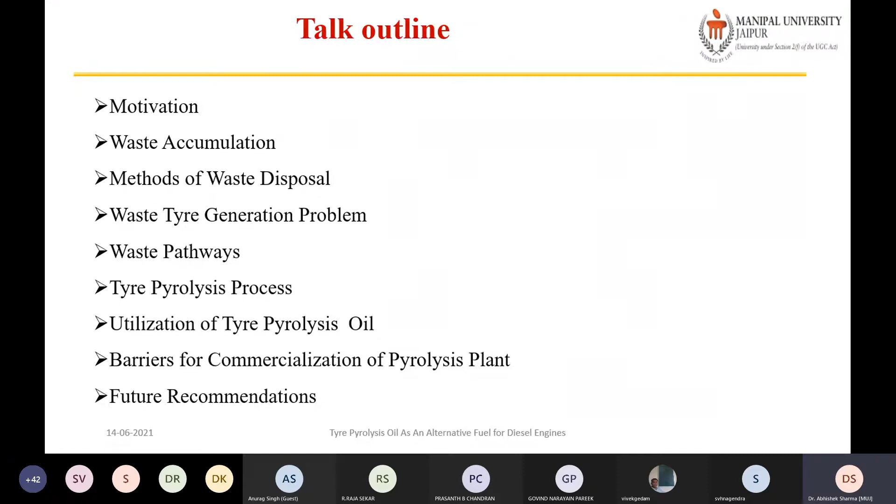So first of all, motivation—why we are discussing waste tire or alternative fuel. We all know in day-to-day life the common problem is global warming, because combustion of fossil fuel produces CO2, carbon dioxide, which is one of the GHG gases, greenhouse gas emissions, and that affects our environment. Second is sustainable development.

Integration of energy, water and environment systems with special emphasis on the principle of circular economy—meaning how the waste of one system can be used as a resource for another system, thereby increasing resource efficiency and minimizing environmental burden. If I talk especially about IC engines, we have tried to use EGR, exhaust gas recirculation, because simply leaving that gas into the environment contributes towards global warming.

Simply, waste heat recovery from power plants—that heat can be used to reheat the water supplied to the boiler. So many wastes are there, we can use that waste and enhance the overall system. Other is waste to energy or waste to wealth.

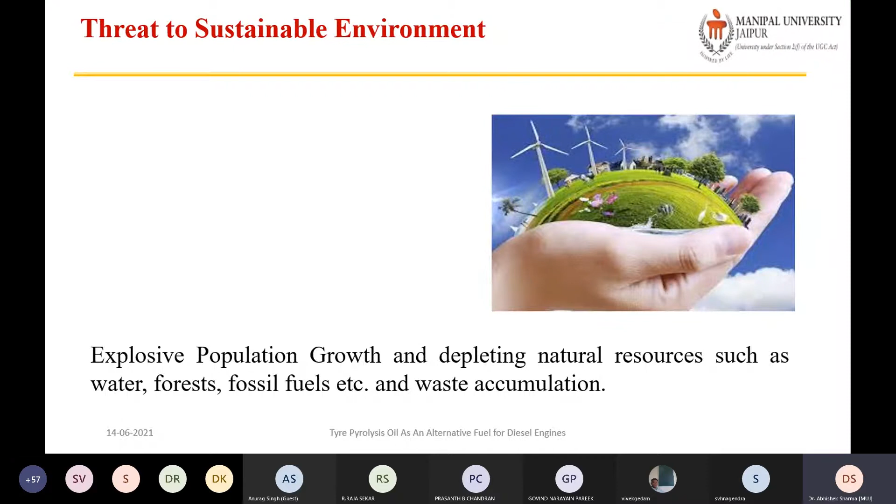To create awareness, I would like to start with this news: the waste generation problem in India. More than 1.3 billion people in India generate the highest amount of waste in the world, and that is expected to increase substantially by 2050 unless urgent measures are taken. This news came in the Times of India, and we can see how much waste is generated.

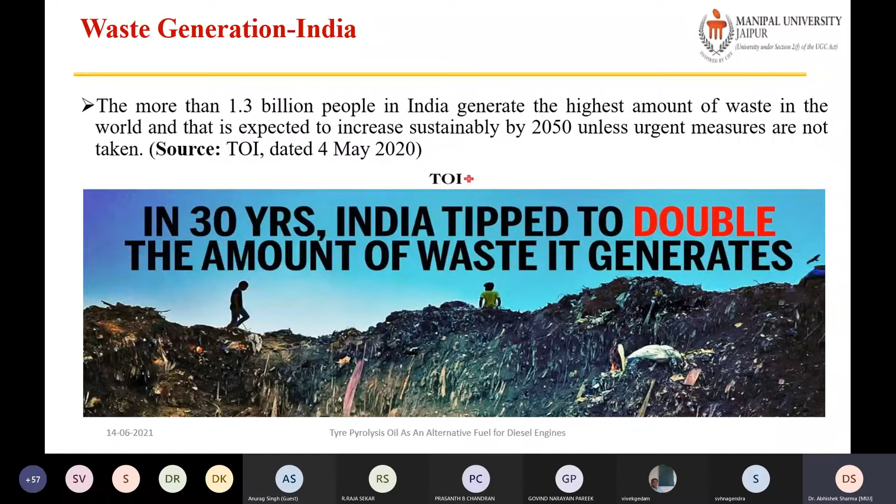We must be careful whenever we go to market, asking for polythene. As educated persons, first of all we must try to minimize the use of such things. So many wastes are there that we cannot avoid, that will come definitely, but from our side, if we can minimize non-biodegradable waste, that will be a big contribution towards the environment.

So first of all, what is the meaning of waste? In simple terms, waste is defined as a discarded material which has no value in normal or ordinary use. What we say is not useful, we simply throw it away - that's waste in common language. But as per EPA, the US Environmental Protection Agency defines waste as any garbage or refuse, sludge from a wastewater treatment plant, water supply treatment plant, or air pollution control facility, and other discarded materials, including solid, liquid, semi-solid, or contained gaseous materials resulting from industrial, commercial, mining, and agricultural operations, and from community activities. So this is the definition of waste.

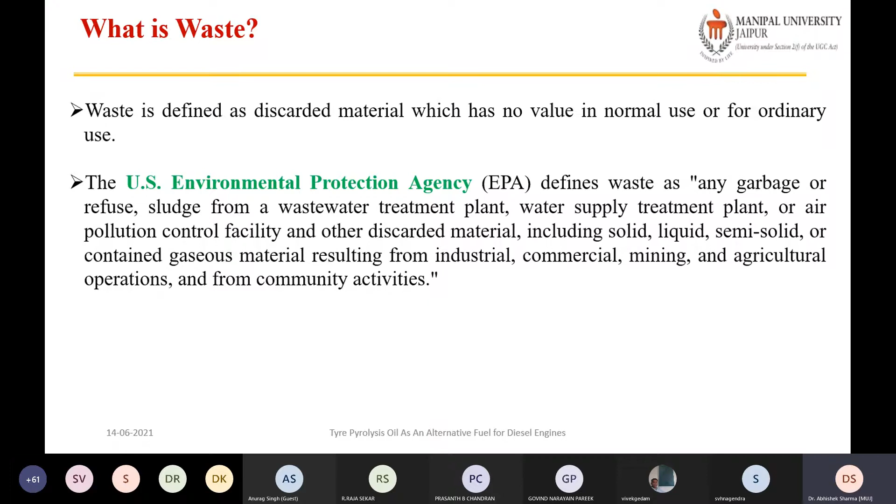So the origin of waste - a broad classification of sources, we can say the different origins of waste. Mining waste, where waste rocks, tailings, mine water, chemicals, and others are there. To minimize this waste and to utilize it, many people are using mining waste to make composites.

Then agricultural waste - some techniques and methods have already been used for a long time using agricultural waste. Especially, some agricultural waste is used to produce ethanol, and other waste is mixed with cow dung and used to produce biogas. These are common methods that have been used since earlier times.

Then industry waste - textile, plastics, chemicals, ash, nuclear waste, and other waste. Here also, if we particularly talk about IC engines, waste generated from sugar industries is also used to generate biogas.

And household, commercial and government bodies produce waste like municipal solid waste, electronics, medical waste, tires and others - these are all non-biodegradable waste. Then construction and demolition waste - concrete, plastic, wood, metal, wastewater treatment. Even sewage sludge - biodiesel can be derived from sewage sludge. So many wastes are there, and there are different options available to convert those wastes into some useful form of energy. These are the broad origins of waste.

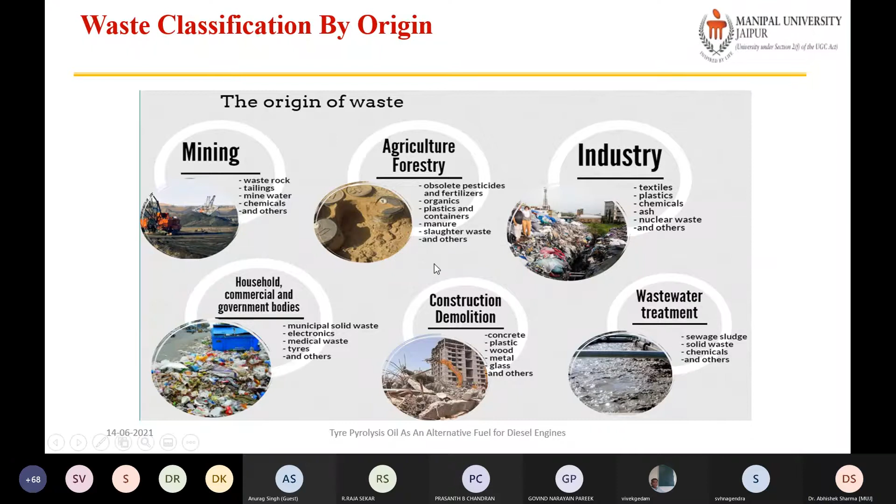This is a fact: there are few things certain in life. One is death, second is change, and the other is waste. Going through all these problems, we cannot say waste can be completely banned or stopped. Definitely there will be some kind of waste, but our responsibility is to use reusable things, so that the waste accumulation problem is minimized. And after that, if waste is coming, we must find a solution so that waste can be used in some useful form.

So why is this waste accumulating, or why are more wastes coming? Rapid industrialization and population explosion result in a lot of waste disposal problems, which will be a great challenge to many countries in the near future. Increase in population is affecting every country. There are different types of waste, like factory waste, domestic waste, e-waste, construction waste, food processing waste, biomedical waste, agricultural waste, nuclear waste, and slaughterhouse waste.

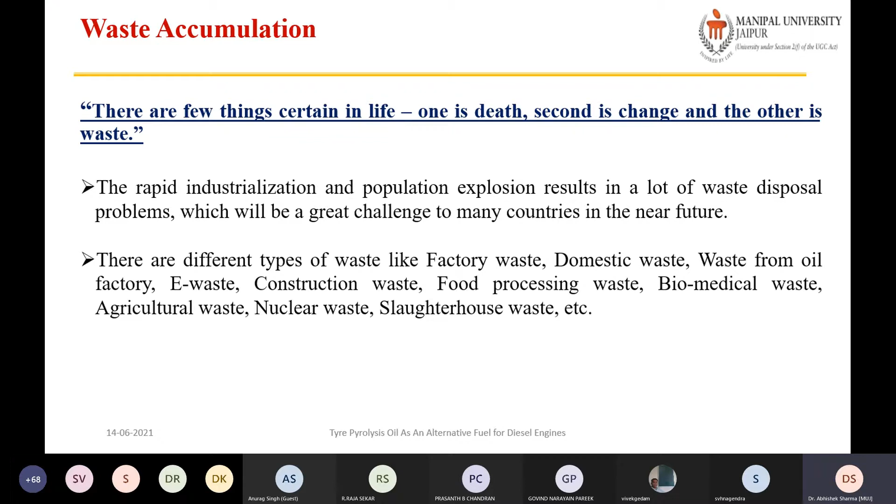So these are the different sources of waste. Waste is broadly categorized in two types. The first one is biodegradable waste, which consists of organics that can be utilized for food by naturally occurring microorganisms within a reasonable length of time.

The biodegradable organics comprise agro residue, food waste, leaves from garden waste, from poultry farms, etc. We need not worry much about biodegradable waste, because after some time it will automatically degrade. But we must think seriously about non-biodegradable waste.

These are waste which does not decompose in the environment and pollutes it to a great extent. Such waste generally composed of plastics, rubbers, nuclear waste and their likes. These waste take millions of years to decompose, and they are the ones which are mostly filling the landfills.

For example, we go for servicing. We do not bother about whatever used lubricating oils are coming. What these service center people are doing, simply they throw it somewhere. They will not bother about how much impurity is there, where they are throwing it, how badly that will affect the land and the environment.

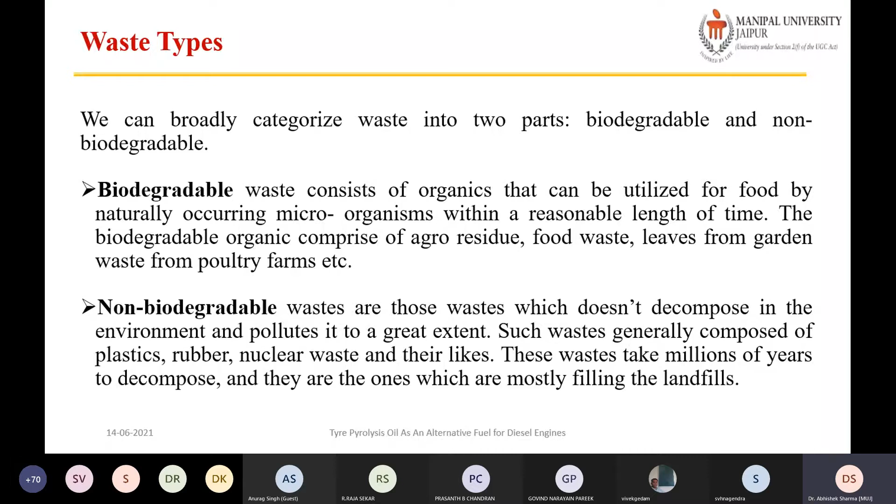So these are the common harmful effects of waste accumulation. What we do, we simply dump somewhere. We do not think where we are throwing it. But when rainy season comes, this waste comes to our door. The same thing happens in Kerala also.

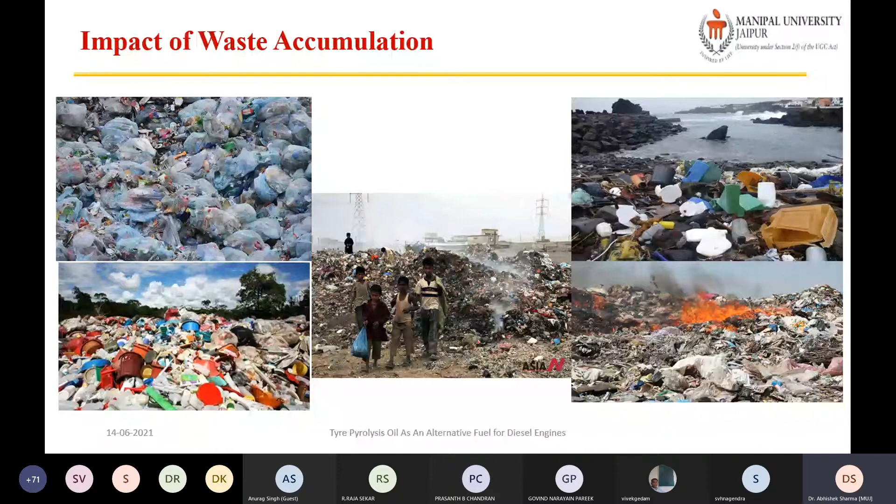So we must think seriously in this direction, how we can minimize the waste, or how we can convert this waste into some useful form of energy, or how we can recycle this waste. So these are the common methods: landfill, where we simply dump all this waste in a yard.

In the morning, waste is collected door to door and simply dumped somewhere. Other methods are there: incineration, where in industry some waste is sent to a furnace, burned, and the heat energy is used. Or waste compaction, or biogas generation.

If someone has a large amount of land and animals, he can use his agricultural waste and cow dung to generate biogas. In that manner, he is converting waste into a useful form of energy, and whatever byproduct comes, he can use as manure.

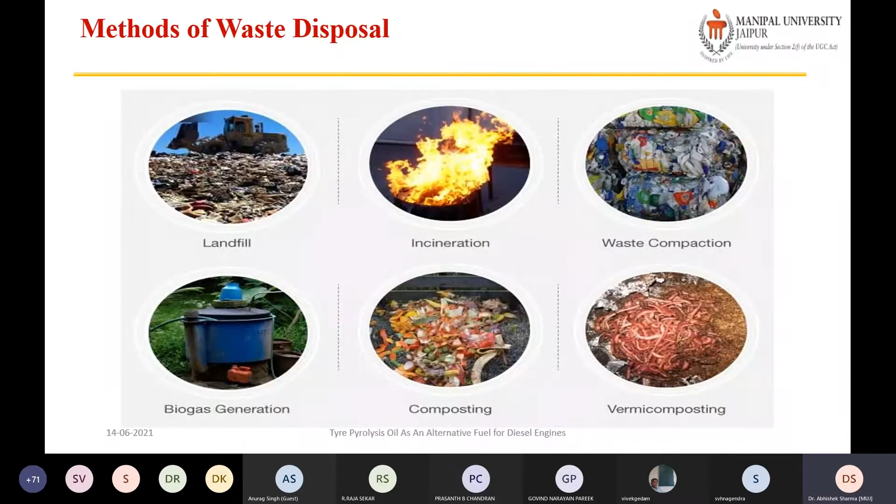Other methods are composting, so organic biodegradable materials, no issue, will compost, or vermicomposting. So these are the common ways of solving the waste accumulation problem.

If we compare old and recent techniques of waste management or waste treatment, in earlier days disposal and incineration were common, but disposal simply meant putting waste somewhere in dump yards. So that will be an environmental disaster.

Many times we have seen that automatic burning starts, or even if it doesn't, just by accumulation so many gases come, that is greenhouse gas emissions. Incineration also contributes towards greenhouse gas emissions.

The recent methods are biological treatments and thermal treatments. We have learned many thermoconversion methods. By biological treatment and thermal treatment, we can convert this waste into some useful form of energy. Which method we must select depends totally on the feedstock.

So these are the different methods. If we do broad classification, there's thermochemical process and biochemical process. In thermochemical process, there's incineration, direct burning in the furnace, and whatever energy is released we can use for many applications. Also gasification and pyrolysis.

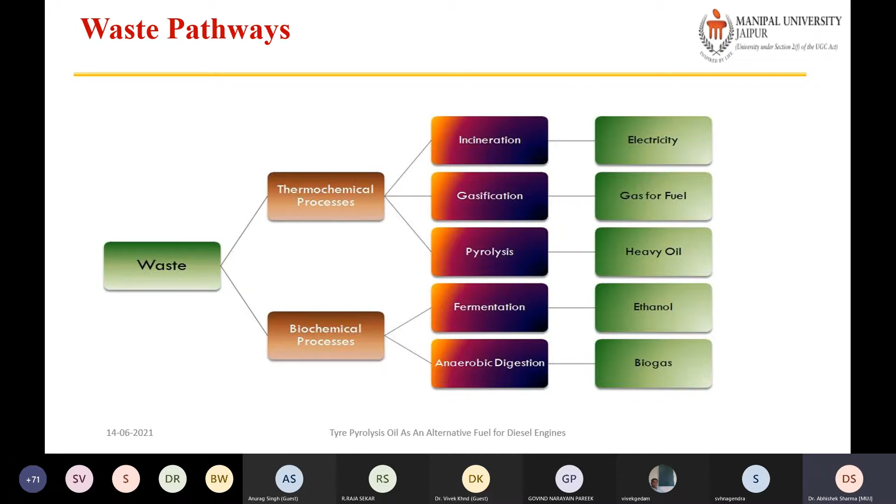So coming to the main point, the waste tire generation problem - what is the issue, how is this waste generated, what are the different possible wastes. The number of waste automobile tires in the world increases every year due to the increase in vehicle population. It is estimated that about 2 to 3 billion tons of waste automobile tires are disposed annually in the world.

Because of showcasing also, nowadays in every house - in earlier days we hardly had one two-wheeler or one four-wheeler, but nowadays if a family has 4 members, everyone has their separate vehicle. So population is increasing, and the priority of individuals having vehicles is also increasing, so the number of automotive vehicles is increasing. Because of this, we are not only contributing too much pollution to the environment, but also the waste generation of tires, because after some time tires reach end of life and become waste.

So the waste automobile tires are majorly disposed from the USA, European countries, Australia, Japan, China, and India. The waste tire is composed of rubbers, chemicals, steel wire, fabrics, and cotton.

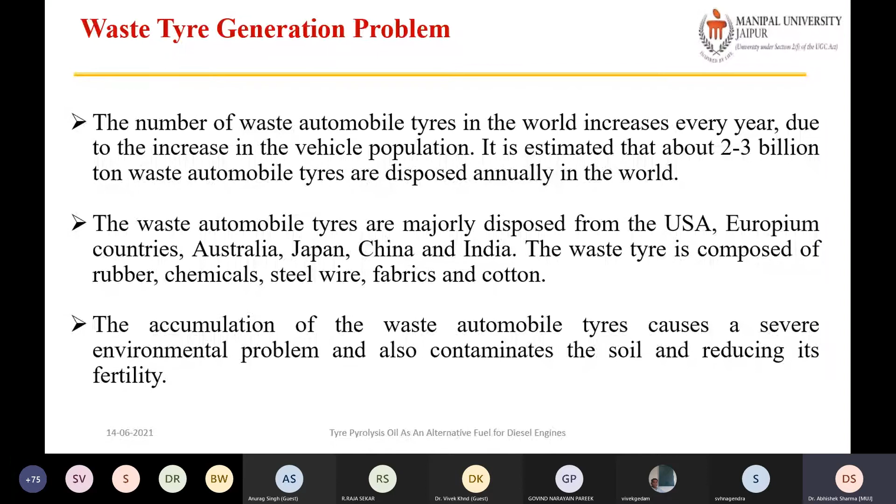The accumulation of waste automobile tires causes severe environmental problems and also contaminates the soil, reducing its fertility. These dumps are a serious threat to both the natural environment and human health because of the risk of fires, and they are used as suitable habitats by rodents, snakes, and mosquitoes.

Even sometimes, inhaling petrol or the burning of tires, some people feel very good, but you will be wondered to know that by inhaling this, tire pyrolysis oil absorbs hemoglobin from human beings. Also, because of continued inhaling, men can become impotent and women can become sterile. So these are various serious issues.

So we must never burn tires or plastic in the open atmosphere. The burning of automobile tires is toxic and harmful to human beings, and therefore it is banned in most countries in the world. The anthropogenic gases rising from the disposal area is one of the reasons for greenhouse gases.

So one simple way, even in our day-to-day life, we collect different types of waste and find the optimal solution is burning. But we don't know that by burning, we are contributing towards greenhouse gas emissions and global warming. So many kitchen wastes are there too - rather than simply disposing of that, we can convert it into manure by keeping it in small gamlas. These are very small and common things which we can do to reduce waste accumulation.

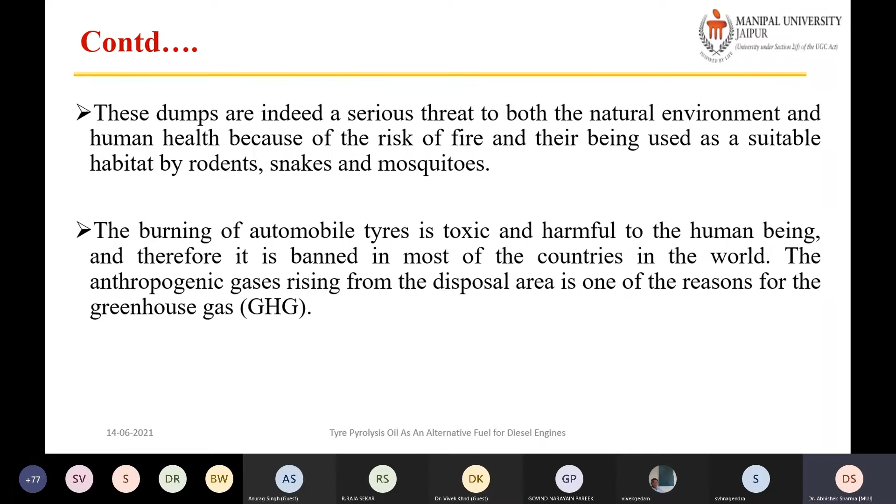So open tire emissions include criteria pollutants such as particulates, carbon monoxide, sulfur oxides, oxides of nitrogen, volatile organic compounds, and they also include non-criteria hazardous air pollutants such as polynuclear aromatic hydrocarbons, dioxins, furans, hydrogen chloride, and benzene. These are the different pollutants which we get by burning of tires.

So these are the primary pollutants, but we don't know that these primary pollutants, when they come in contact with air, with oxygen, in the presence of sunlight, convert into secondary pollutants - photochemical smog, ozone depletion, acid rain are the secondary pollutants. So not only greenhouse gas emissions and global warming, but also a threat to the environment is there when we burn tires in the open atmosphere.

One of the major fire hazards recorded in history was in 1999, when a tire dump in Westley, California burned for 36 days after being accidentally ignited by lightning, which caused pyrolytic oil to flow and contaminate nearby streams and water bodies. Many such incidents have already happened everywhere, so we must avoid accumulating and burning tires.

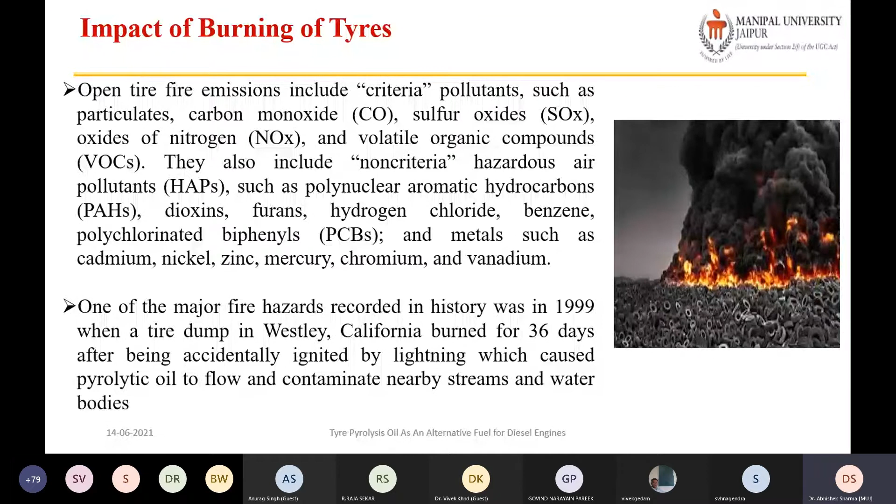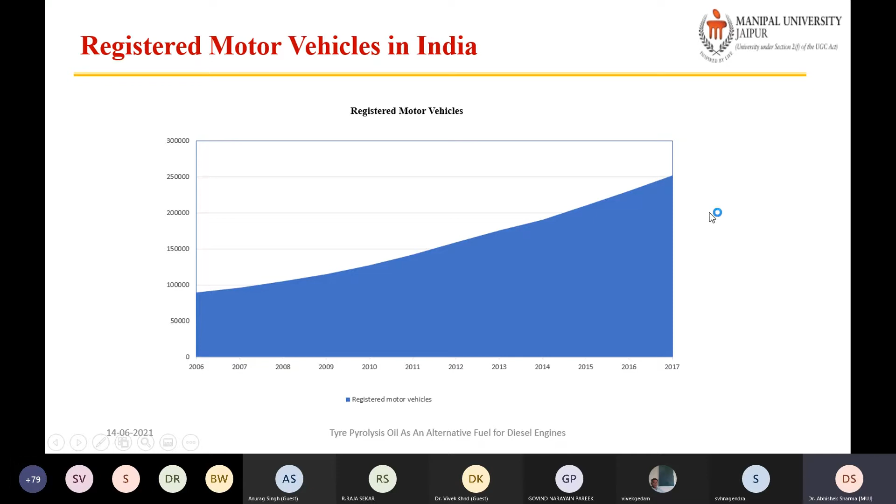This is the case - we can see that year to year the number of automotive vehicles is increasing, and in this manner, the accumulation of waste tires is also increasing.

So what are the common ways of tire recycling? First, some plastics are recyclable, so we can recycle those. Here also the most common way is retreading. The worn part is replaced by a new one, so a new tread is applied on the casing of the old tire to use it in its new form. The tread is a groove cut on the tire surface, used to provide friction between the road surface and tire.

Then there's the end of life tire, which we can recycle or use for energy recovery. How can we use it for energy recovery? Simply by co-combustion with coal to produce thermal energy, used in the boiler to produce electricity. From earlier times, waste tires have been used in cement furnaces to get heat energy. Then the promising way is pyrolysis.

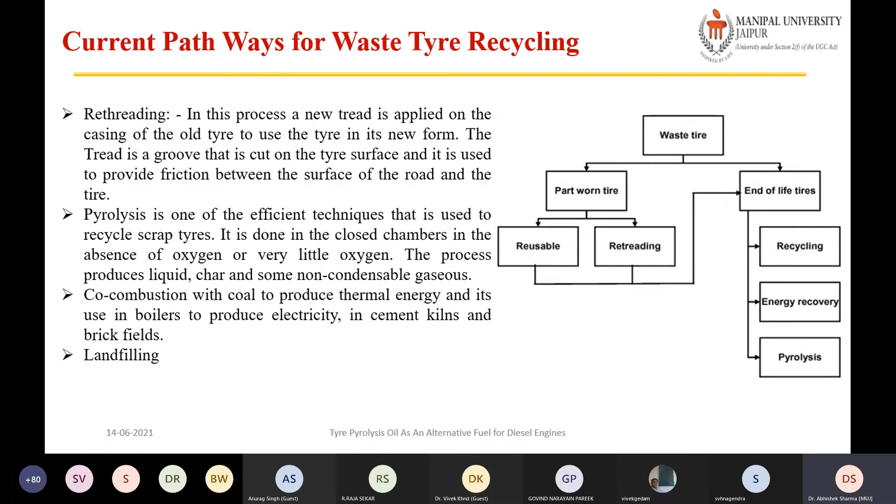Among all these, pyrolysis is one of the most efficient ways to convert this waste tire into a useful form of energy. Pyrolysis is one of the efficient techniques used to recycle scrap tires. It is done in a closed chamber in the absence of oxygen or with very little oxygen, and this process produces liquid, char, and some non-condensable gases.

So why are we thinking about waste to energy? Because global energy demand is increasing dramatically due to increased industrialization, the overwhelming rise in number of automotive vehicles, and growing population. So population is increasing, number of automotive vehicles are increasing, and at the same time fossil fuel is depleting. That's why we are thinking more about the use of renewable energy to convert waste into energy.

As per the reports of the International Energy Agency, global energy demand is expected to increase by about 53% by 2030. That's why a lot of research is going on in electric vehicles, biofuels, and solar energy. So we are moving towards non-conventional, renewable energy sources.

Currently approximately 86.3% of world energy demand is fulfilled by fossil fuel, in which crude oil contributes about 32.6%, whereas coal and natural gas contribute about 30% and 23.7% respectively. After all this, the contribution by non-conventional energy sources is only about 13 to 14%. This contribution needs to increase in terms of solar energy, wind energy, energy from biomass, and waste to energy.

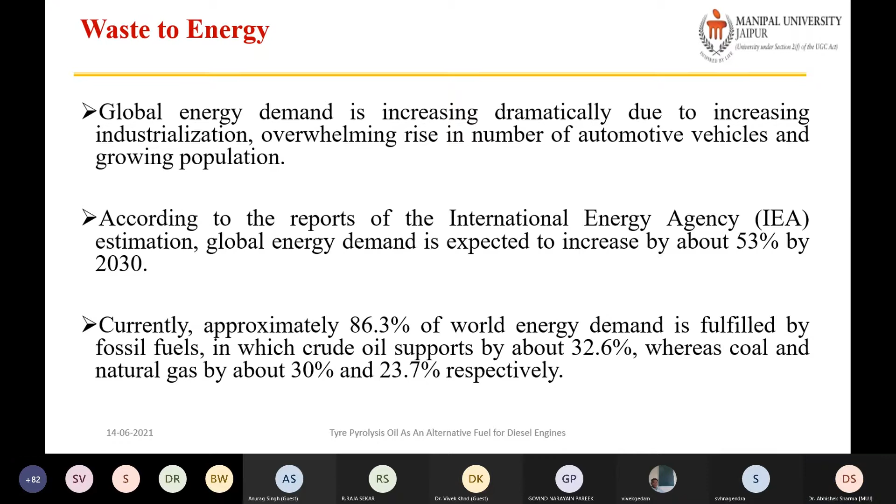So that is the reason we are thinking about how waste can be converted into a useful form of energy. On the contrary, nuclear energy and hydroelectric energy contribute only a small portion, about 4.4% and 6.8% respectively.

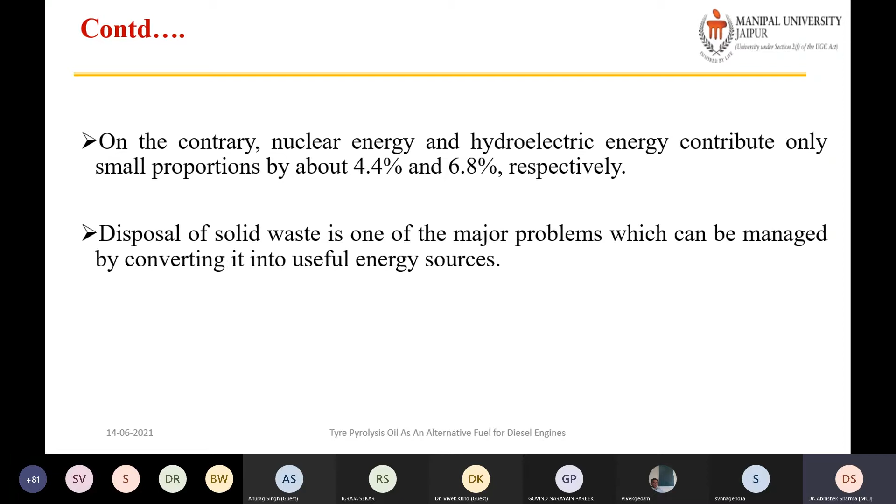Disposal of solid waste is one of the major problems, which can be managed by converting it into a useful form of energy. If we simply dump it somewhere, it will occupy land and also generate anthropogenic greenhouse gases. By converting this waste, we are not only solving the accumulation problem, but also generating energy and generating wealth from this waste.

So how can we do this? Pyrolysis is one of the thermochemical methods. This method can be used to convert waste tires, and even different types of waste, so we can select this process to convert them. But sometimes it depends on the particular feedstock, where we do not get that amount of yield.

Pyrolysis is one of the thermochemical methods to convert waste automobile tires into useful energy. The thermal decomposition of biomass in the absence of oxygen into carbon-rich solid and volatile matter is termed pyrolysis or thermolysis. It is derived from the Greek word pyro, meaning fire, and lysis, meaning breakdown or decomposition. In this process, heavier molecules are broken down into simpler molecules in the absence of oxygen by external heating.

Pyrolysis is a simple method to convert waste automobile tires into value-added products. In pyrolysis, long chain polymers are thermally broken down at high temperatures, 300 to 900 degrees. But based on previous research, we can conclude that the maximum amount of yield is obtained by pyrolysis at about 500 degrees centigrade, breaking the polymers into smaller molecules in the absence of oxygen.

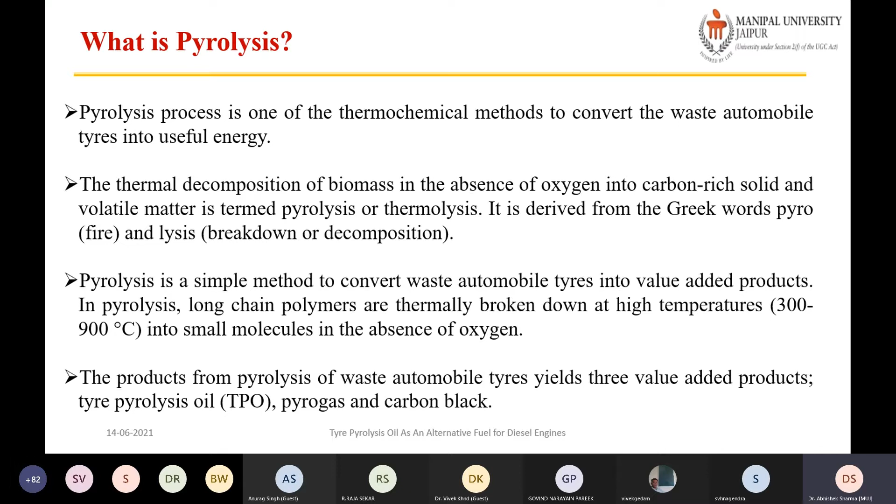So the first one is the liquid. When biomass is used, sometimes it is also known as bio oil or pyrolytic oil. Based upon the feedstock, the name is also given, like waste wood is used to convert into useful form, so that is known as wood pyrolysis oil. Some amount is pyrogas, which also has some energy and can be used as a fuel, and carbon black.

So this is the process of pyrolysis. First, in the reactor, tire is fed, and inert gas is flowed to create vacuum. Pyrolysis is done in the absence of oxygen, or in the presence of very little oxygen. Then external heating is done, so the waste tires are converted into vapor form, and those vapors are condensed, then we get the liquid product.

So suppose 1 kg of tire we are feeding, then about 50 to 55% yield is liquid. Then about 25 to 30% yield is solid carbon black, also known as char, and about 20% is pyrogas. All three yields can be used for different purposes. So by this process we can convert the waste tire into 100% usable form.

So these are the compositions of tires. From the pyrolysis process we get the products. Pyrogas is a combination of different gases: hydrogen, carbon dioxide, carbon monoxide, methane, ethane, propane, butane, and oils. When we condense oils at different vapors at different stages, the quality of oil varies. So if in a particular reactor we condense the oil in 3 different stages, we get 3 different qualities of oil. And char is also there.

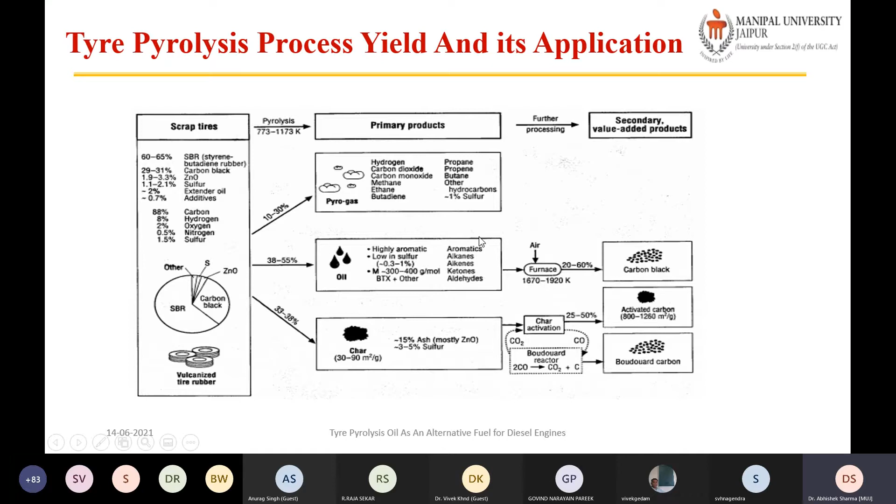So what are the different yields? As already discussed, there are basically three yields: solid, liquid and gas. Liquid from the pyrolysis is also known as tire pyrolysis oil. The amount of liquid produced from the pyrolysis process is the highest compared to solid or gas products.

The color of this liquid is dark brown and has resemblance to crude oil. The liquid at the end of pyrolysis consists of organic additives, processing liquids as part of the tire formulation, and tire formulation products. The TPO has energy content in the range of 39 to 44 megajoule per kg, depending on the feedstock used. So by this process, the maximum percentage, about 50 to 55%, of liquid product we get is known as tire pyrolysis oil.

So before using it as an IC engine fuel, we must check different properties. One of those is the calorific value, which is in a good range, about 39 to 44 megajoule per kg. This liquid is actually a mixture of different types of hydrocarbons, but its properties are closer to diesel fuel. That's why this tire pyrolysis oil is used especially in diesel engines.

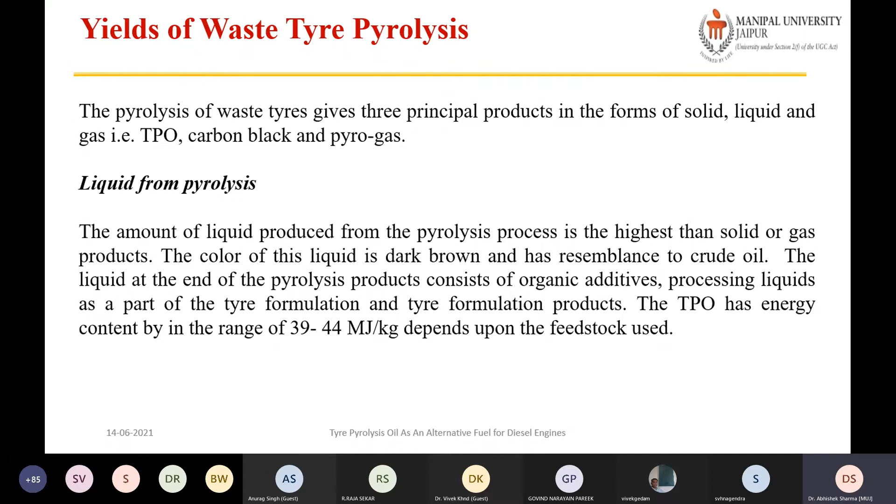Then gases from pyrolysis. After the recovery of liquids from the pyrolysis process, some gases formed during the process are left, which are non-condensable. These gases are called pyrolytic gas or pyrogas, mainly composed of hydrogen, carbon monoxide, carbon dioxide, methane, and ethane. These gases also have some calorific value and can be used as fuel.

So in European countries, what they are doing is initiating or starting the furnace by other means of heating, like wood or electric, and after that, when these gases are produced, they collect the gas in a gas bag, or simply use it in the furnace. So rather than simply sending it to the environment, we can use this gas as a source of energy.

Other is char from pyrolysis. This solid product is also known as char or carbon black. We get about 25 to 30% char. The pyrolysis process gives an opportunity to recover carbon rich solids from used organic matter. In the case of tires, the carbonaceous solid formed is partially carbon black and partly the inorganic material added to tires like Si, Zn, Ca. This also has calorific value, about 25 to 34 megajoule per kg, depending on the type of pyrolysis and feedstock used.

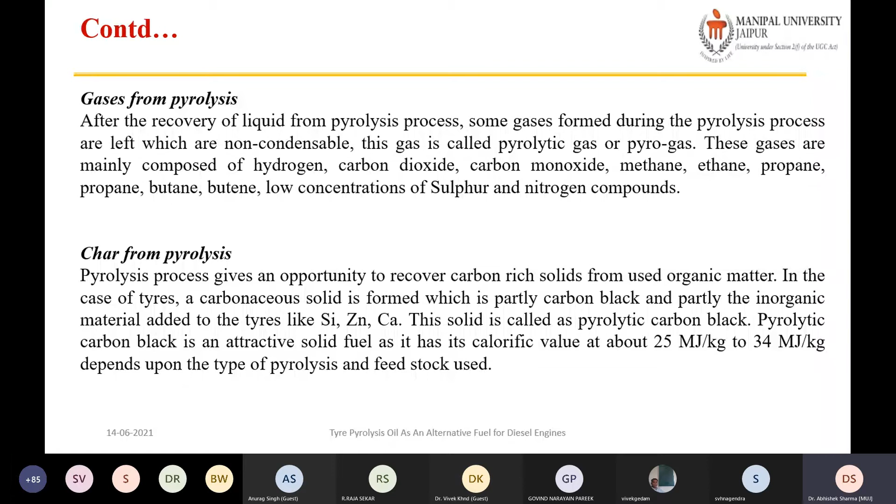So, types of tire pyrolysis process. There are different ways to classify pyrolysis based on operating conditions and environment, such as hydropyrolysis, vacuum pyrolysis, catalytic pyrolysis, oxidative pyrolysis, steam pyrolysis, slow and fast pyrolysis. Based on the environment and catalyst used, many types can be classified, but the broad classification is on the basis of temperature: low temperature, medium temperature, and high temperature pyrolysis, also known as slow, fast, and flash pyrolysis.

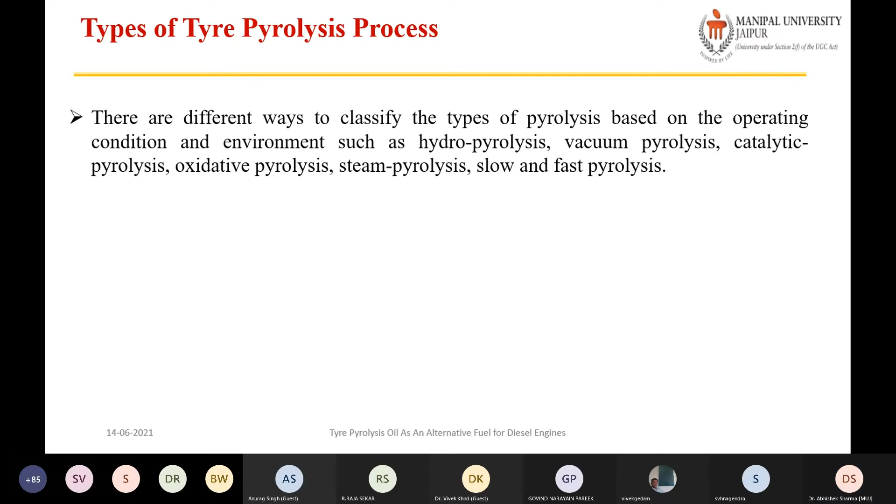What happens in low temperature pyrolysis? This is also known as slow pyrolysis or conventional pyrolysis. It completely depends on which kind of output we want - more liquid, or more gaseous by-product. Based on that, the pyrolysis process is also classified.

In low temperature pyrolysis, it is usually carried out in combination with slow pyrolysis. This is also known as conventional pyrolysis, which has higher residence time; higher amounts of solid and liquid products are formed, and lower amounts of gaseous products are formed. In case of waste tire, the maximum amount of liquid yield is obtained between 450 to about 550 degrees centigrade.

Then medium temperature pyrolysis is generally used for maximum conversion of carbon into biomass. There is a linear increase in temperature which simultaneously increases the conversion of carbon to higher yields. It can be used when there is more requirement of gaseous products and a small requirement of coke and tar.

Then the third one is known as high temperature pyrolysis, also known as flash pyrolysis. It comes with a high heating rate and small particle size. It helps in the rapid removal of volatile particles. It is the first step towards gasification of biomass. These conditions decrease the tar yield. The process is a combination of both slow and fast pyrolysis depending upon the product required.

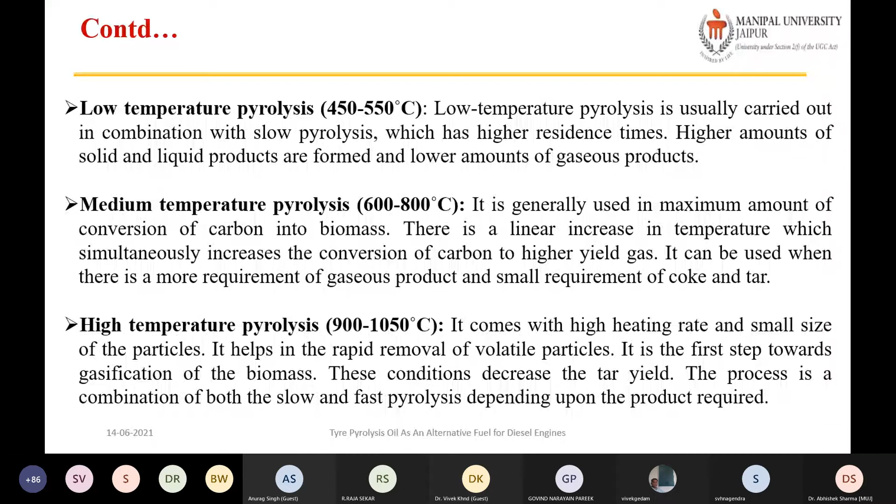Then the important factors which affect the output are temperature - pyrolysis liquid yield decreases on increasing the temperature above 500 degrees centigrade. Then heating rate, which is also one of the most important parameters affecting output - higher heating rates need more energy while pyrolysis time is decreased. Then particle size - if the particle size is finer, the liquid yield will increase.

Types of pyrolysis reactor - which kind of reactor we are using also affects the yield of the process. Carrier flow rate and type - which kind of inert gas we are using to create vacuum, and what is the flow rate. Residence time of the volatiles inside the reactor. These are some important factors which affect the output of the process.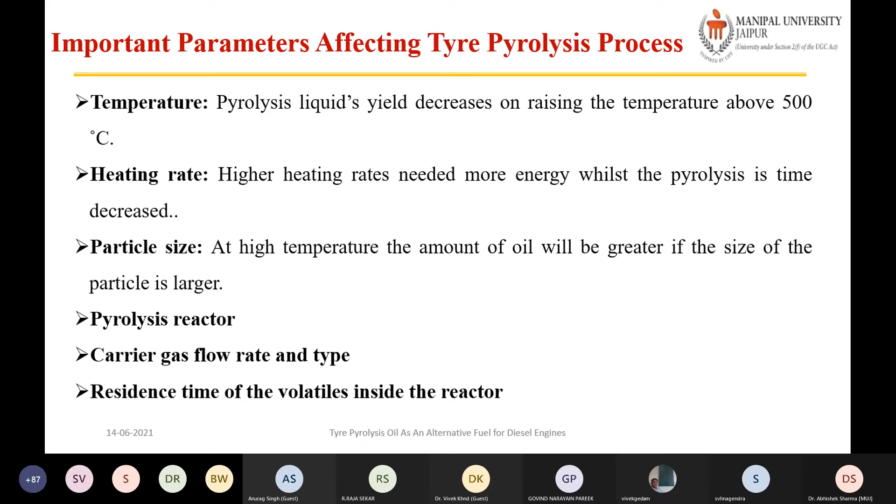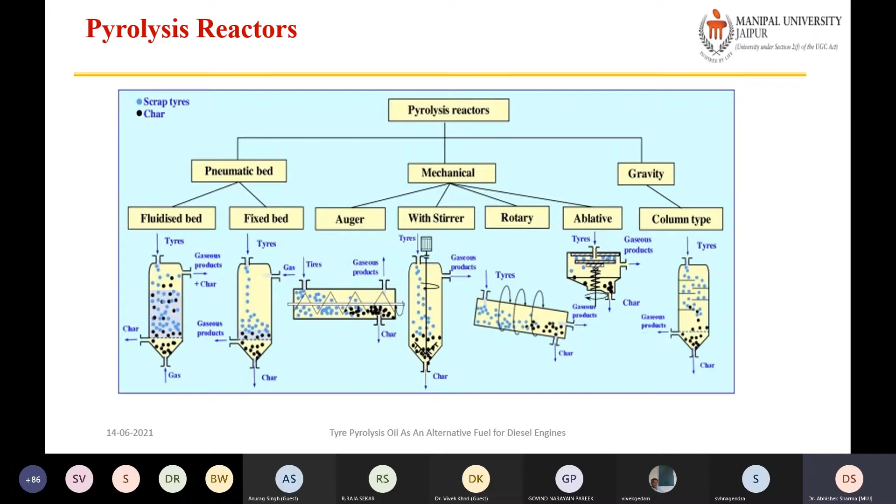These are some common types of reactors. The classification is pneumatic type and mechanical gravity. The most common types of reactors used are fixed bed and rotating ones. Even in our waste to energy laboratory, we have a fixed bed reactor and a rotary bed reactor, where we convert different types of waste into useful form.

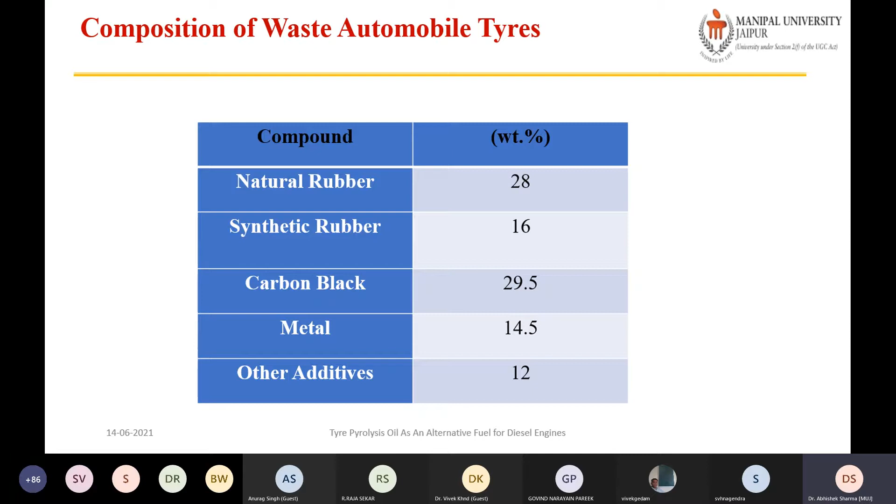Now I'm particularly going to discuss the pyrolysis of waste tires. This is the compounds available in a truck tire. Natural rubber is about 28%, synthetic rubber is about 16%, carbon black, metals, and some additives to enhance the properties of the tire make up about 12%.

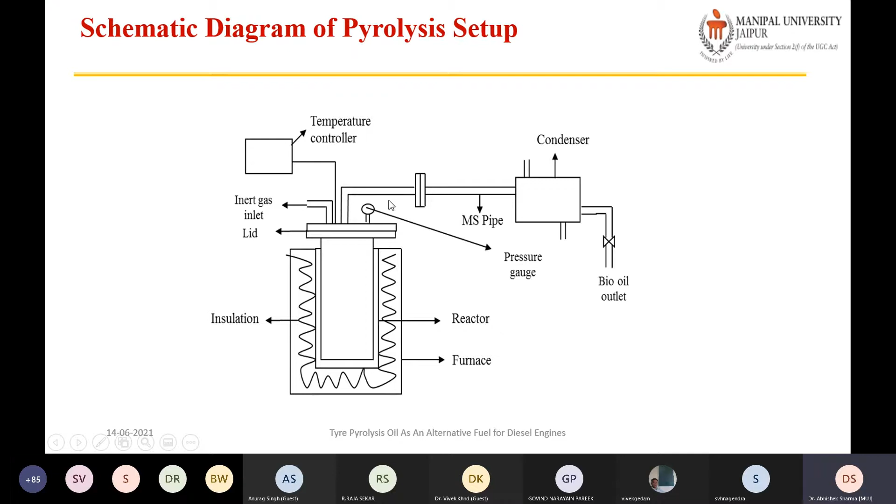This is the reactor. After heating, the vapor generated is collected here, when it cools down through the condenser. So this is the small scale laboratory type pyrolysis reactor.

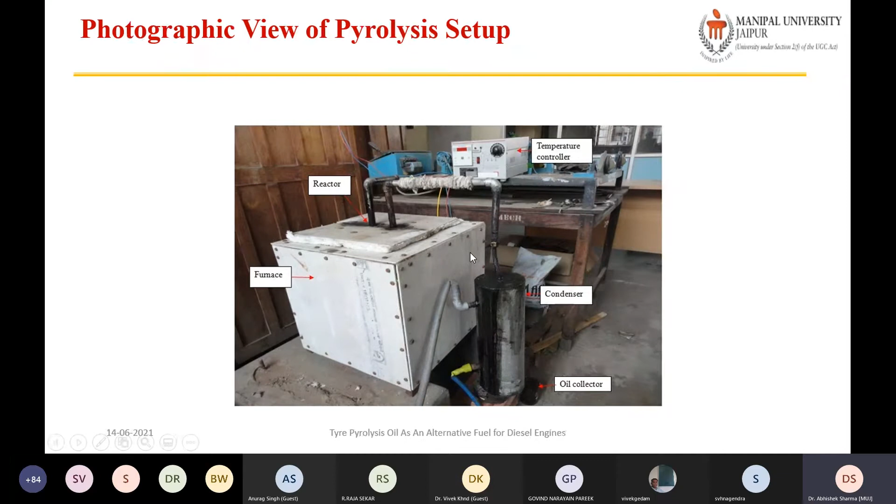The feed chips were heated in the reactor unit in the absence of oxygen, and a temperature controller was used to control the temperature. I did the experiment at 3 different temperatures: 450, 500, and 550 degrees. What I observed is that I got the maximum amount of liquid yield at 500 degrees.

Centigrade. Then the products of pyrolysis, in the form of vapor, were sent to a water-cooled condenser, and the condensed liquid was collected as pyrolytic oil. The oil was drained through the outlet of the oil collection tank.

In my case, I only had one condenser, so at one point only I collected the oil. But I have visited some industries where they have 3 or 4 different stages. At the different stages they collect the vapor, and they get different qualities of oil.

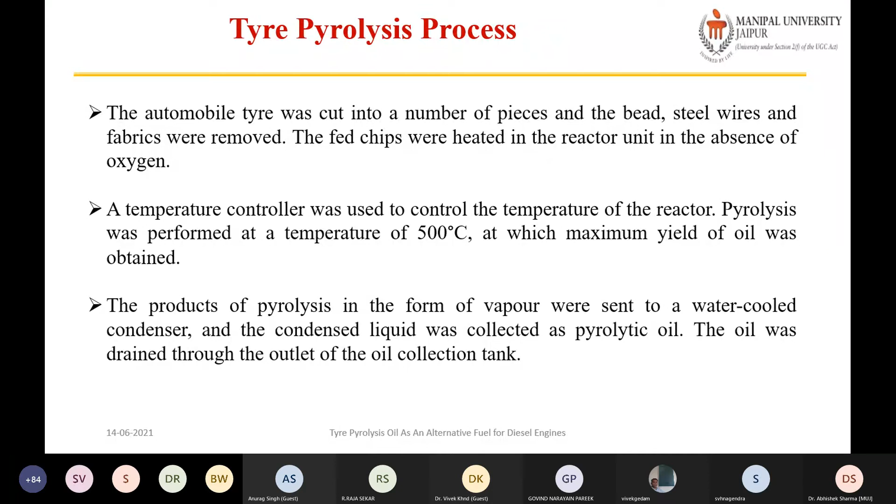So the TPO was crude in nature. The approximate yield from the process was 50% TPO (tire pyrolysis oil), 40% gases, and 10% char, found at the optimum yield temperature by taking 750 grams of sample in the reactor. The recovered TPO, a mixture of paraffins, olefins, and aromatic compounds, is a dark brown liquid and has a considerable heating value.

Its properties are similar to those of diesel. Although it is a mixture of different types of hydrocarbons, meaning these fuels have some properties of petrol, the properties are closer to diesel, which is why research activity is focused on diesel with respect to diesel engines.

The non-condensable gases were collected in a gas bag and used as a secondary fuel in dual fuel mode engine operations. This work was done by an MTech candidate. The gas was collected and used as secondary fuel. These non-condensable gases have calorific value, so they were inducted through the intake manifold while diesel was injected as usual. In this manner, some amount of diesel was replaced by these non-condensable gases.

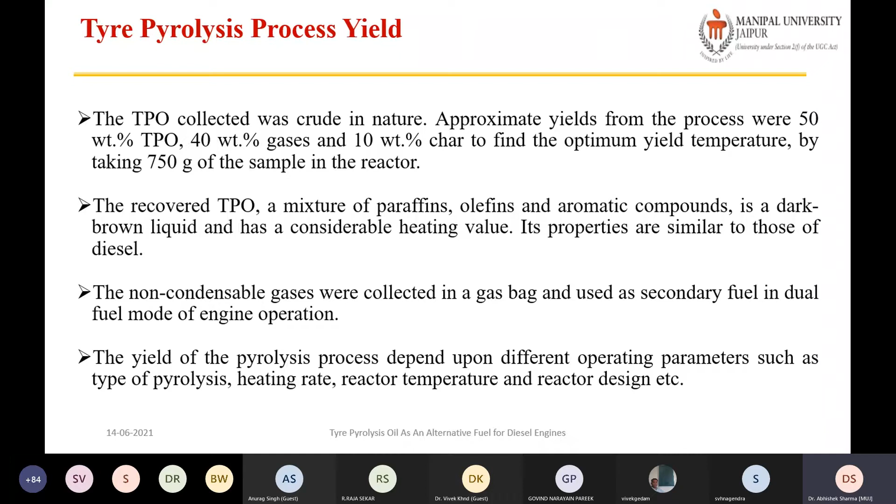The yield of the pyrolysis process depends upon different operating parameters such as type of pyrolysis, heating rate, reactor temperature, reactor design, type of inert gas used, flow rate, and all those things. We can see that as the temperature increases, the amount of liquid product decreases and the gaseous product increases.

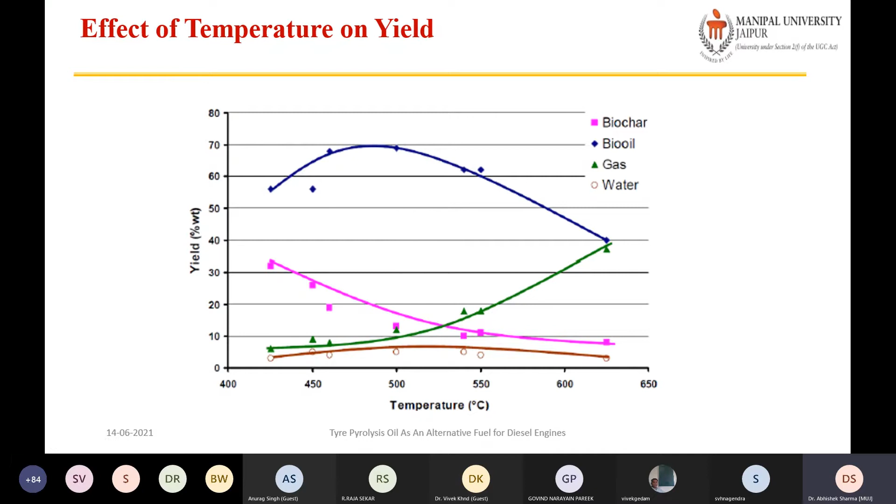In India, especially in Odisha, Rajasthan and Gujarat, many pyrolysis plants have been started. Even some persons who have this plant, one himself has about 14 tire pyrolysis plants. The cost of the initial setup of a 10 ton capacity plant is about 20 lakhs only.

So what he does is remove the steel wires first. They have all automatic systems. This steel can be recycled; it is not used in the pyrolysis process because it is very hard, takes much time, and decreases the yield. So they keep it separate.

They do not use the pyro gas, whatever non-condensable gases they get. Some gases do not condense, so what they do is simply release them into the environment. They do not care what the CPCB, Central Pollution Control Board, will say, because they run the plant after taking permission somehow, but they do not follow the rules and regulations.

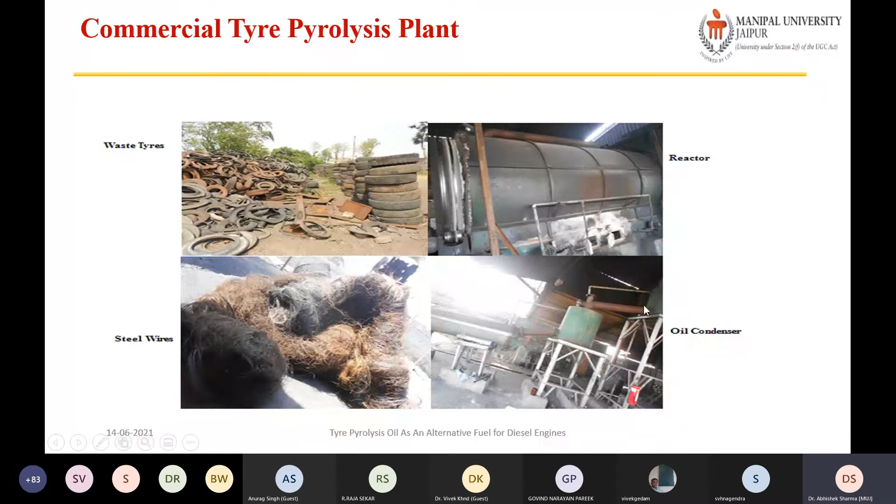These tire pyrolysis oils are considered a dirty fuel; they are not a clean fuel. But if we think about it, rather than burning in open atmosphere, we are converting it into the form of oil. In this oil, the percentage of sulfur content is about 2% only. So although this is not 100% okay, at least this way is better for solving the waste accumulation problem of tires rather than burning them in the open atmosphere.

So this is the photograph.

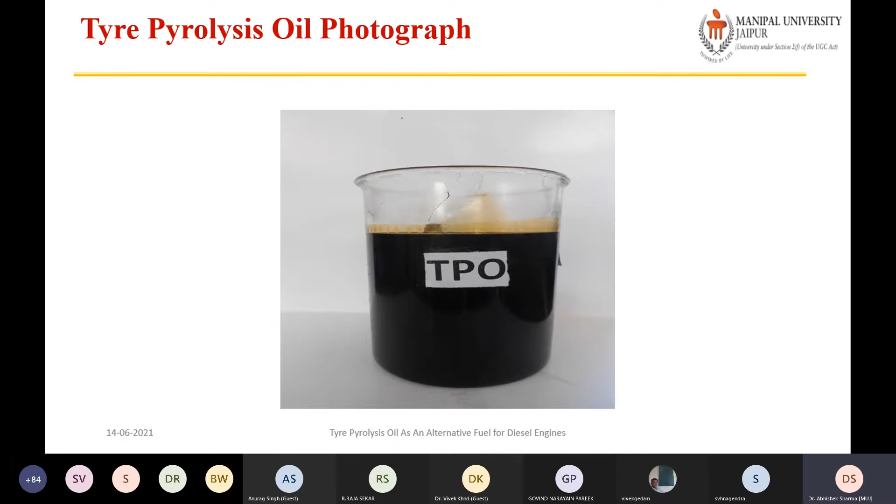So different properties of the fuel need to be considered. So whenever we think about using this as a fuel or not, some important properties we must check. Especially for diesel engines, viscosity is one of the most important properties, because fuel is injected, and if we use a higher viscous fuel, the droplet formation and spray formation will be poor. In that case combustion may not happen properly, or the delay period will be more, or knocking may happen and abnormal combustion may occur. So we must consider the different properties.

In general, viscosity is the measure of internal resistance to flow in a fluid. The viscosity of tire pyrolysis oil is close to diesel, but in some cases higher viscosity has been reported when truck tires were used. It is in the range of 2.16 to 17 centistokes. Addition of alcohol reduces the viscosity. Generally, most papers report the viscosity of tire pyrolysis oil varies from 2 to 4 centistokes, but depending on the type of pyrolysis process or type of reactor, or if co-pyrolysis is done, the viscosity varies. Diesel's viscosity is about 2.3, so the viscosity falls in the range of diesel. So that is not much of an issue.

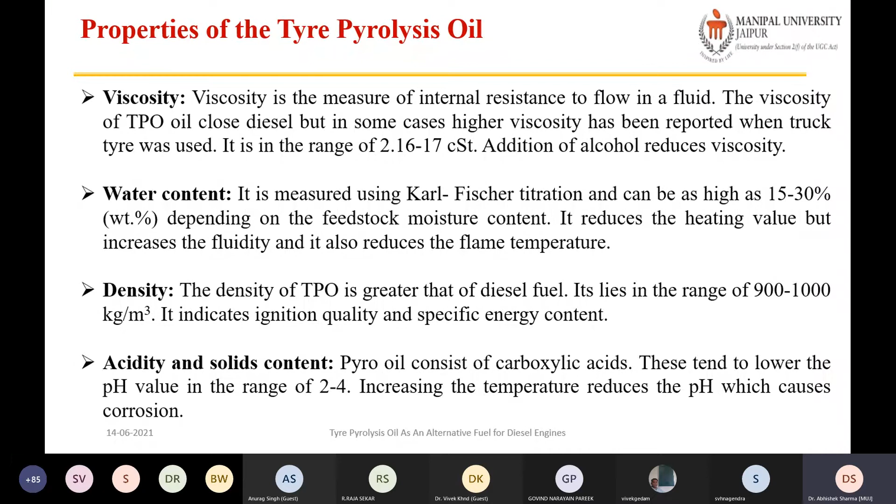Acidity and solid content is also one of the issues. The pyrolytic oils are known to be acidic. Different feedstocks have been used - even waste wood has been tried, waste plastic has been tried, thermocoal is tried. Pyro oil consists of carboxylic acids, which tend to lower the pH value in the range of 2 to 4. Increasing the temperature reduces the pH, which causes corrosion.

Then carbon, hydrogen, nitrogen, oxygen, and sulfur content. Carbon is about 40 to 60%, because this decides the calorific value and ignitability of the oil. There is 40 to 60% carbon content in fast pyrolysis oil and 70 to 80% in slow pyrolysis oil respectively. Hydrogen is about 6 to 8% in fast pyrolysis and 10 to 12% in slow pyrolysis oil. Oxygen content is about 2 to 4%, which is very good because this enhances the combustion quality. Sulfur and nitrogen content are very low, with sulfur content about 2%.

Then heating value. This is dependent upon the density and chemical composition. Carbon and hydrogen increase the heating value of the fuel. The tire pyrolysis oil has a lower heating value of about 39 megajoules per kg based on the feedstock composition, so the heating value is relatively less than diesel fuel.

Carbon residue in the oil is higher than diesel. So when such oils are used for long term, more carbon deposits are observed on the piston. It causes formation of deposits during combustion.

Flash point is very important for storage purposes. It is the lowest temperature to which a fuel must be heated to cause vapor to ignite. The flash point of tire pyrolysis oil is highly dependent upon the feedstock. Generally, these oils have a low flash point and should be stored carefully. Flash point varies from 65 degrees centigrade to 90-95 degrees centigrade, again depending on different conditions like type of pyrolysis process, type of reactor used, the temperature at which pyrolysis is carried out, the kind of feedstock used, and the condition of the feedstock.

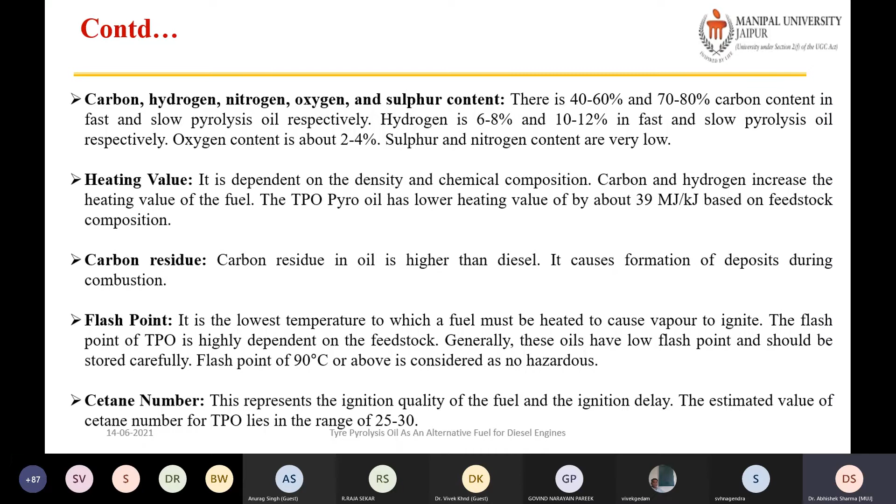Now I am moving towards how tire pyrolysis oil was used as a replacement for diesel fuel, as an alternative fuel. Whenever we think about alternative fuel, many things come into our mind. We think we can convert this into alternative fuel, but so many things are there. Which fuel is available? Is it suitable for a particular application? Because some fuels exist that we cannot use for all IC engine applications, and some fuels like solid fuels may be used as alternative fuel but cannot be used directly in the engine, depending on state - solid, liquid, or gaseous.

How is it explored, extracted, stored, transported, converted from raw state to commercial usable state? What is the cost of the fuel? Suppose we get any good alternative fuel which is less pollutant, or generates less pollutants, but if cost is more, then also we cannot use it.

How much is the combustion temperature? Because if combustion temperature is more, definitely more NOx emission will be there, since NOx emissions depend on two parameters: combustion temperature and availability of oxygen. Then how much heat is released, how can thermal efficiency of the process be increased, how much will be the fuel consumption. If a fuel has less calorific value, for developing the same amount of power which diesel develops, we need to provide more fuel, so consumption will be more, and the storage tank must be bigger in size.

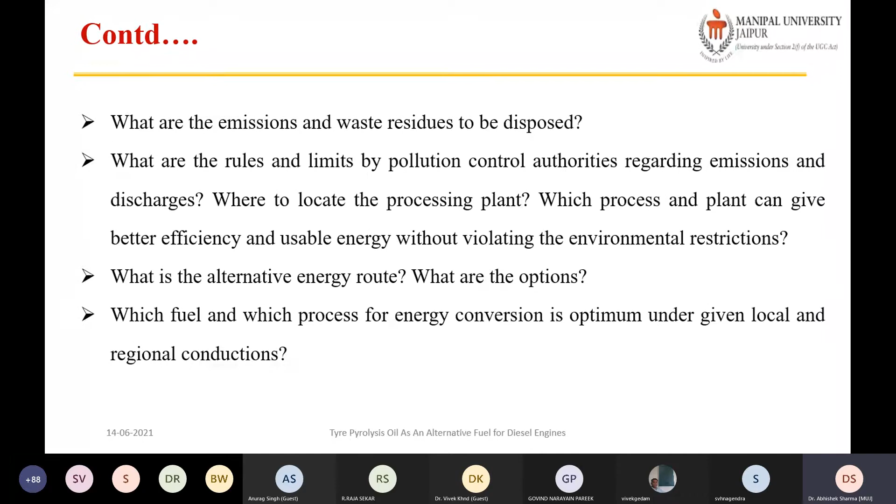In earlier investigation, this pyrolysis research started about 25 to 30 years ago for tire pyrolysis oil. The first paper I have seen is by P.T. Williams: pyrolysis oil from waste automobile tires has higher sulfur content. The main drawback of TPO is its lower cetane number, which is in the range of 25 to 30. So 100% tire pyrolysis oil use as a sole fuel in diesel engine is not that much possible. This problem can be solved by blending TPO with fuels of higher cetane number. Another issue is that pyrolysis oil obtained from waste automobile tires contains aliphatic and aromatic compounds.

In particular, they compose benzene, so many aromatic compounds are there. Because of that, smoke opacity is more in case of tire pyrolysis oil.

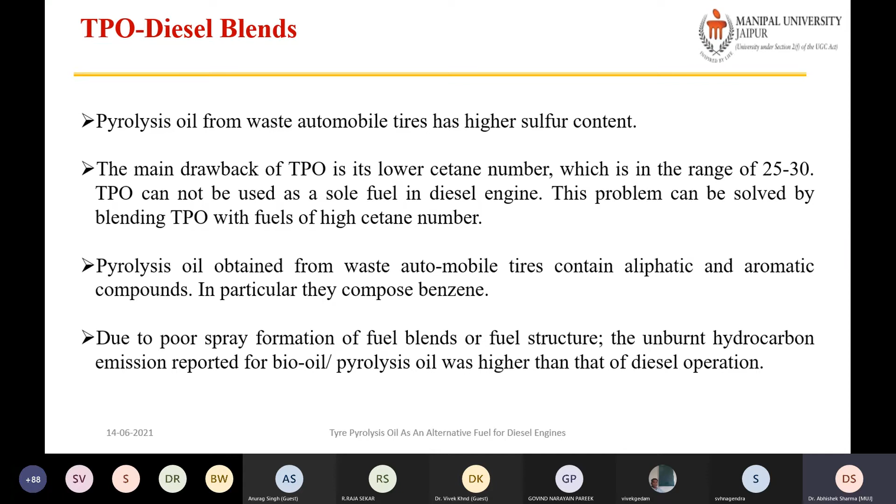Due to poor spray formation of fuel blends or fuel structure, the unburned hydrocarbon emission reported for bio-oil pyrolysis oil was higher than that of diesel operation. Why did this happen? Because of the moisture content and the viscosity is also very high, proper spray formation may not happen. So because of incomplete combustion, unburned hydrocarbon and carbon monoxide emissions come, and higher smoke emission was reported in most of the cases.

In earlier investigations, many researchers tried the use of tire pyrolysis oil blended with diesel as a fuel, and they reported higher smoke emissions. The presence of aromatic content and complex structure of pyrolysis oil were mentioned as reasons for higher smoke emissions.

Then most of the researchers reported higher nitric oxide emissions, oxides of nitrogen. The reason mentioned was longer ignition delay. What happens is, longer ignition delay means more fuel will be accumulated, and when combustion takes place, the in-cylinder temperature will be more. Also, about 2 to 4% oxygen is there, and the diesel engine already runs with a lean mixture. Because of all those reasons, NOx emissions are more in some cases.

But in some cases, they have reported lower NOx emissions also, and the reason was the presence of water and low cylinder temperature. Moisture content is there, so because of that, the NOx emissions are less also.

Some researchers have tried to remove the moisture content by distillation, and by distillation the properties of the crude oil enhance significantly, and the results are better than using crude oil. But again, the cost associated will also be increased, so that is the issue.

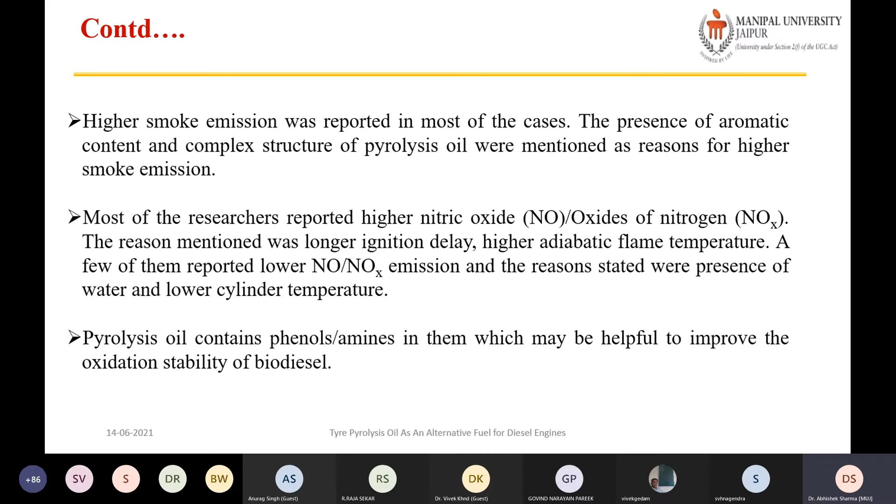The disadvantage of biodiesel is oxidation stability, and that problem is also solved to some extent by blending with tire pyrolysis oil. So we need not add any synthetic antioxidants, because the phenolic compounds present in the tire pyrolysis oil act as natural antioxidants.

Based on all those things, I blended tire pyrolysis oil from 10 to 50 percentage with Jatropha methyl ester biodiesel, because in India we prefer biodiesel derived from non-edible sources, especially Karanja and Jatropha, and the Indian government is also supporting plantation of the Jatropha tree.

So because of all those concepts, I tried from 10 to 50%, meaning 10% tire pyrolysis oil and 90% Jatropha methyl ester. Similarly, I went up to 50-50, 50% tire pyrolysis oil and 50% Jatropha methyl ester.

This is the complete setup. This is the single cylinder diesel engine. The data acquisition system is connected here, and this is the AVL 444 gas analyzer. By means of this gas analyzer, we insert the probe and get emissions like CO (carbon monoxide), HC, NO, O2, CO2 — all these emissions can be measured using this AVL 444 gas analyzer.

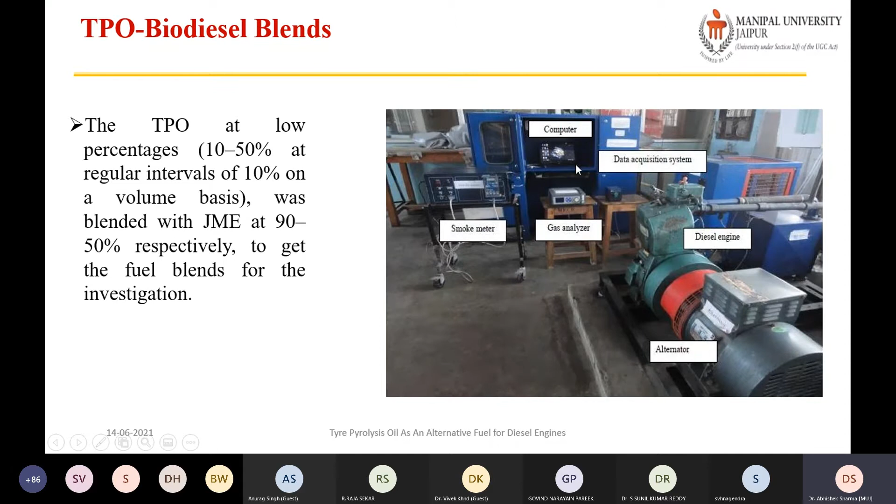This is the smoke meter, AVL 437 smoke meter, and by using this we can get the amount of smoke opacity available in the exhaust. Other things here — pressure transducers are connected, so the in-cylinder pressure at each half degree of crank angle can be noted down, and we get all these results. Fuel sensors are there too, so all these results we get through different sensors in Excel form, and then we can analyze the results.

This is the specification of the test engine. The Kirloskar model TAF 1 is a single cylinder, 4-stroke, constant speed, air cooled, direct injection CI engine. These engines are also known as research engines, particularly these stationary engines manufactured for research purposes. Maximum power output was 4.4 kilowatt at constant speed, that is 1500 RPM.

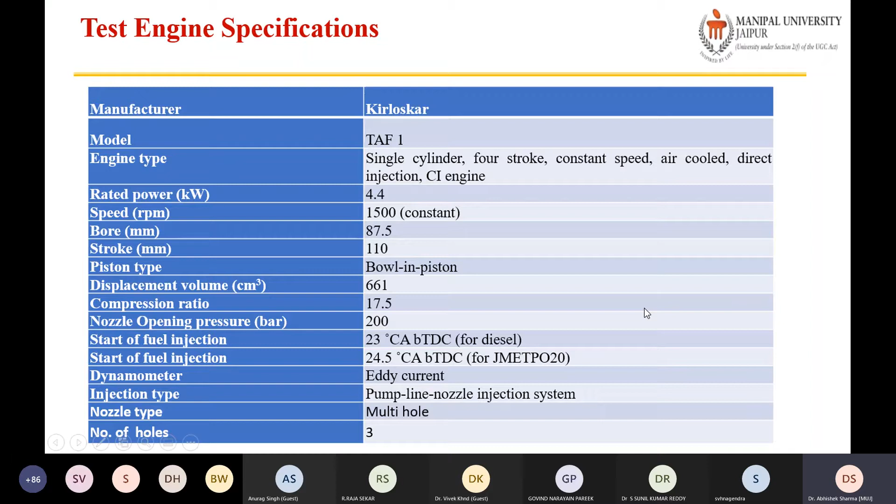Bore diameter was 87.5. The type of piston is the bowl-in piston. Compression ratio used was 17.5, and the pressure at which fuel is injected is 200 bar. Fuel is injected at 23 degree before crank angle, before TDC. So these are the specification of the engine, some important properties.

I carried out the experiment from 5% to 50%, meaning 5% tire pyrolysis oil with 95% Jatropha methyl ester, up to 50% tire pyrolysis oil with 50% Jatropha methyl ester. But I got the optimum value at JME-TPO20, so I am showing the fuel properties for 20% only.

Here we can see the properties of diesel. The density is 830. Jatropha methyl ester, biodiesel, is known as a more denser fuel, about 881. Density of tire pyrolysis oil is about 913, and for the blend we got about 887. These are some important properties.

The major properties whenever we select any fuel for a diesel engine are density, viscosity, and cetane number. The cetane number was about 52 in case of 20%, because for pure JME this is about 55, and for pure TPO this is about 28%. These are some important properties.

Some other compounds available, GCMS, FTIR, all those things I have also done, but I'm not showing here.

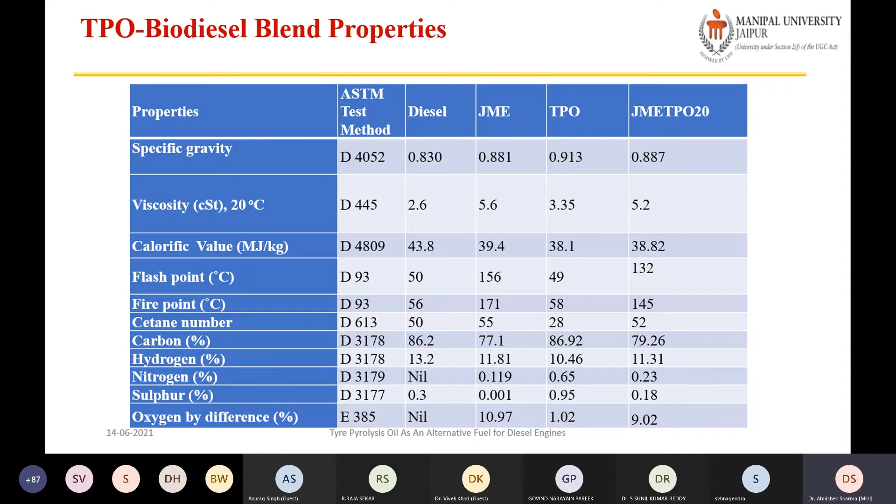These are the photographs of the different blends prepared. The color is a very dark brown, and the smell is also not good. So there's a lot of scope in this process, many things to work on, like how we can enhance the cetane number, reduce the moisture content, or remove the bad smell of this oil.

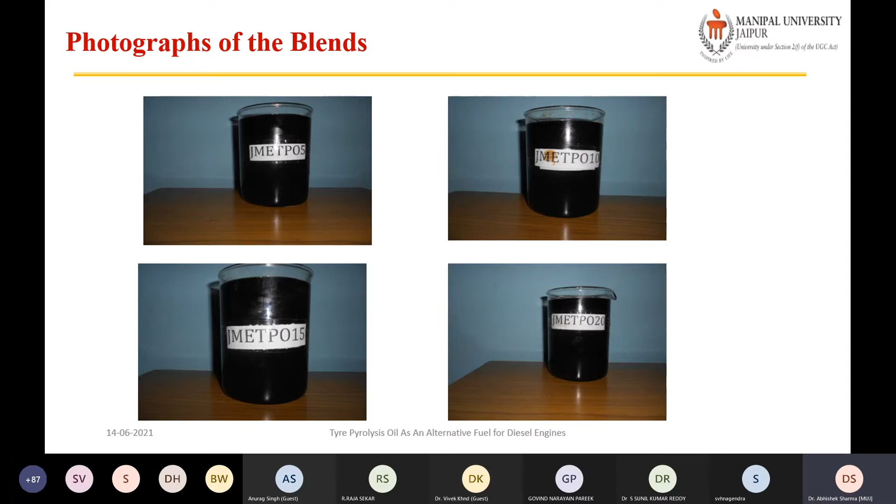Whenever we use any alternative fuel in a diesel engine, we must compare the engine behavior with respect to diesel. Basically, the three important parameters are combustion parameters, performance parameters, and emission parameters. In combustion parameters, especially we deal with in-cylinder pressure, also known as the P-theta curve or pressure crank angle diagram. By seeing this, we can identify when ignition starts.

What I observed is that JME has about 10 to 11% oxygen, which enhances the combustion quality. Although TPO is a low cetane fuel, up to some percentage, like when 20% TPO and 80% JME was used, the start of ignition occurs earlier for JME-TPO20 compared to other blends. For pure JME, it starts much earlier because the availability of oxygen helps this.

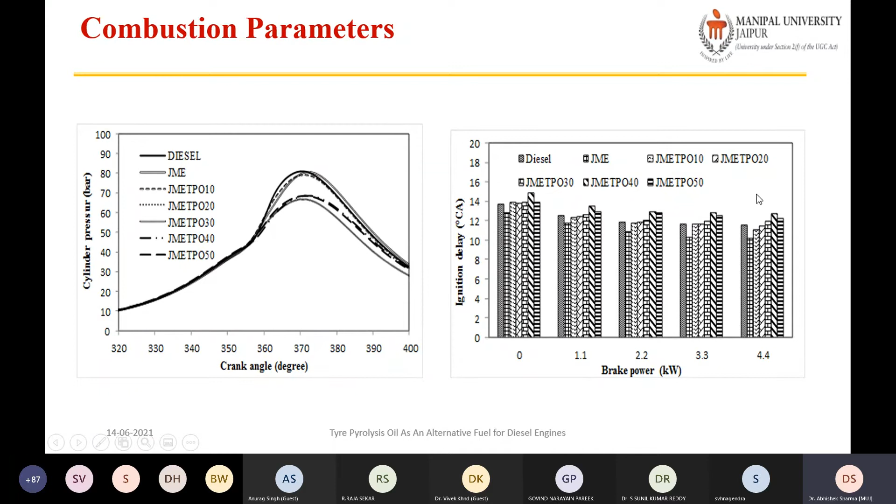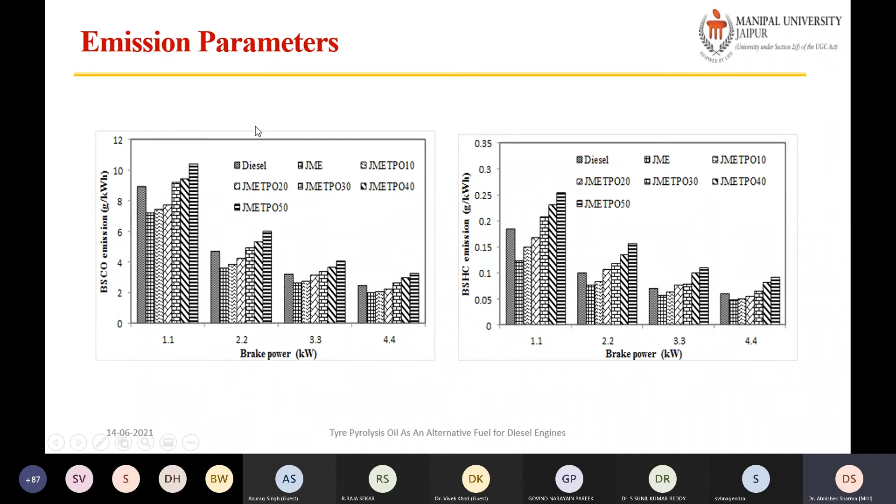NOx emissions depend upon two parameters: availability of oxygen and combustion temperature. The diesel engine already runs with a lean mixture, and apart from that, about 10 to 11% oxygen is available in JME, and about 2 to 4% oxygen is available in TPO. Because of these reasons, NOx emissions are more. Smoke opacity is also more in case of diesel engine.

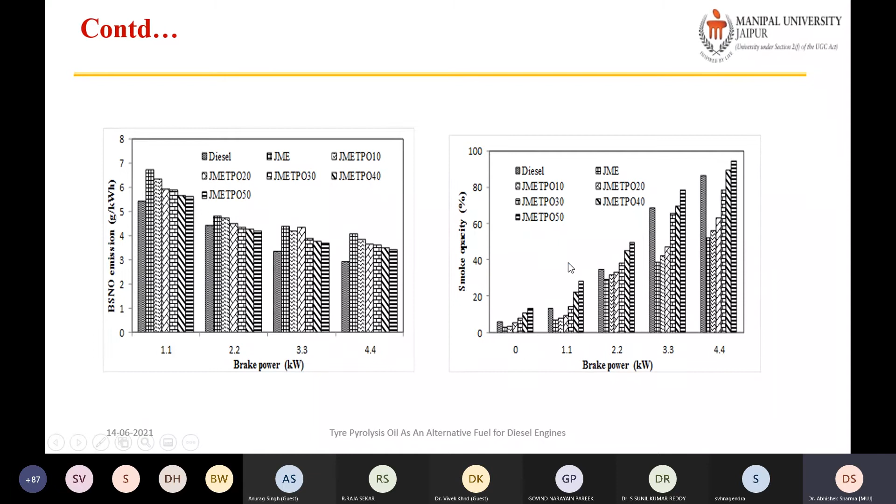When we look at other papers based on biodiesel, we see that if smoke opacity is less, then NOx emissions will be more, like that. But here we are seeing that both are more. The reason is that aromatic content available in the tire pyrolysis oil enhances combustion, and because of that more smoke opacity is observed.

So overall, the summary of that work is that the cylinder peak pressure lowers by about 1 bar for the JME TPO 20 blend in comparison with diesel. Among all 5 blends, the result was more favorable for JME TPO 20.

I compared all these results with diesel. It was found that the ignition delay for the JME TPO 20 blend was almost equal to that of diesel at full load operations. The combustion duration for the diesel engine was 38.34 crank angle at full load, and it decreased by about 0.54 CA for the blend.

At full load, the thermal efficiency was close to diesel operations. For diesel, the thermal efficiency was about 30%, while in case of JME TPO 20, it was about 28.89%. Then the BSEC, brake specific energy consumption, for diesel was 11.86 megajoule per kilowatt hour at full load. All these results are at full load conditions.

The BSEC increased by about 7.8% for the JME TPO 20 blend compared to diesel operations. Carbon monoxide, unburned hydrocarbon, and smoke opacity were lower by about 9%, 8.6%, and 26% respectively. This is expected because the Jatropha methyl ester has oxygen molecules in itself, which enhances combustion quality and reduces these types of emissions.

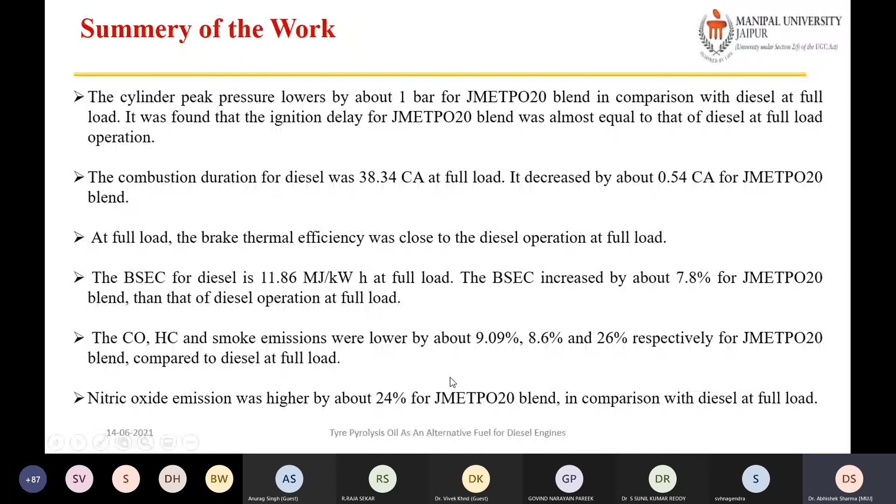But when more TPO is blended, smoke opacity and other emissions increase also. So up to 20%, this remains in a reasonable region. Nitric oxide emissions were higher by about 24% for JME TPO 20. Most of the time, whenever biodiesels are used, NOx emissions are more.

After going through this first set of experiments, I looked into other solutions for how we can enhance the properties and performance of the engine. So then I did some engine modification techniques. For that, as I know the viscosity of the JME TPO 20 blend is more,

I thought that if a fuel is more viscous and we inject it a little earlier, the ignition delay can be reduced and combustion quality can be enhanced. Based on that concept, I conducted experiments with 4 injection timings for the blend.

The injection timing set by the manufacturer was 23 degrees before TDC, meaning fuel is injected 23 degrees before the piston reaches TDC. So what I did was 2 advancements and 2 retarded settings. 23 is the standard; advancements made it 24.5 and 26, advanced by 1.5 and 3 degrees crank angle, and 2 retarded settings at 1.5 and 3 degrees again, giving 21.5 and 20 degrees crank angle before TDC, for JME TPO 20 only, and compared all these results with diesel.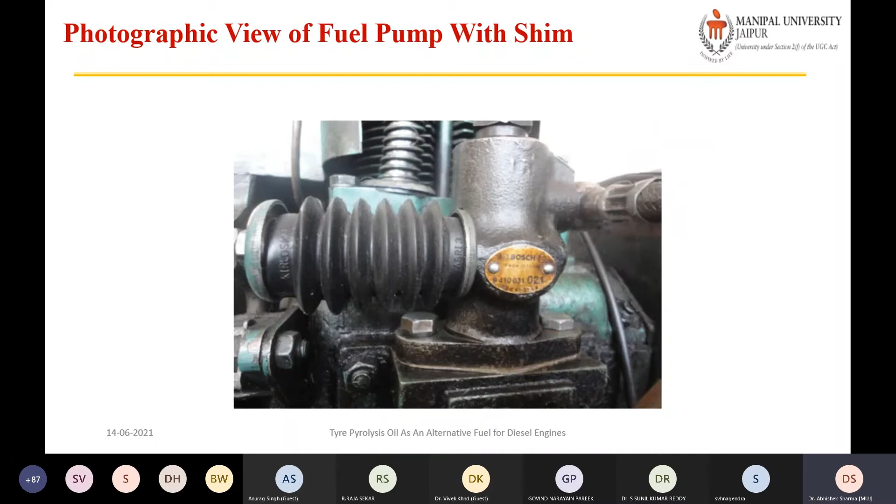When I add an extra shim, making it 4 shims, here 3 is there and one I add extra, the injection timing becomes advanced to 24.5. With 5 shims, it becomes 26. When I remove one, making it 2 shims, it becomes 21.5. With 1 shim it means 20 degree crank angle. This is the photograph of the shims. By using this, I changed the injection timing.

Then I noticed that among all these 5 injection timings, when fuel is injected, as expected, the fuel is more viscous, more dense. So definitely the proper, finer mixture will be prepared at advanced injection timing only.

So with the JME TPO20 optimum blend and the optimum injection timing of 24.5, in the next module what I did was change the injection pressure. The injection pressure set by the manufacturer was 200 bar. I carried out tests from higher side, from 210 to 250.

If you go more higher, then also there is no use, because in that case fuel particles will be injected inside the cylinder and will directly hit the cylinder walls. So that will not mix with the air and will not release heat energy, and that will be the reason for carbon deposits. So we cannot go for much higher injection pressure.

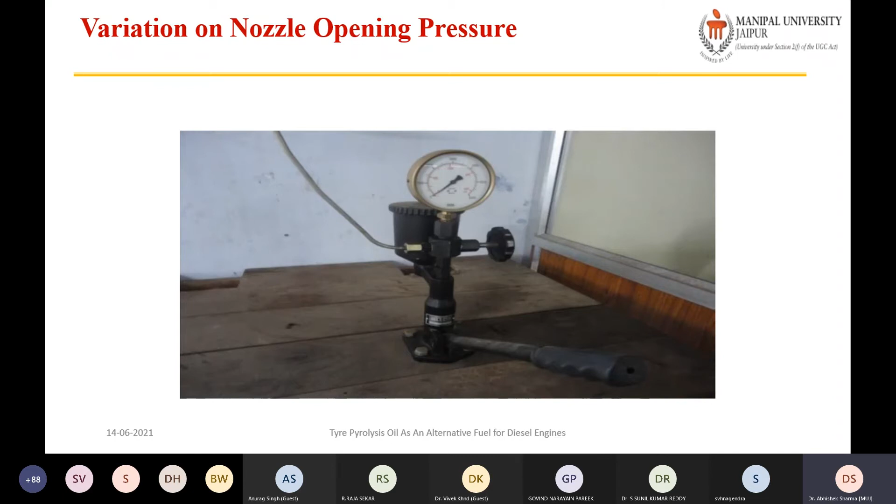So I tested 5 injection pressures, and I found that 220 bar was the optimum.

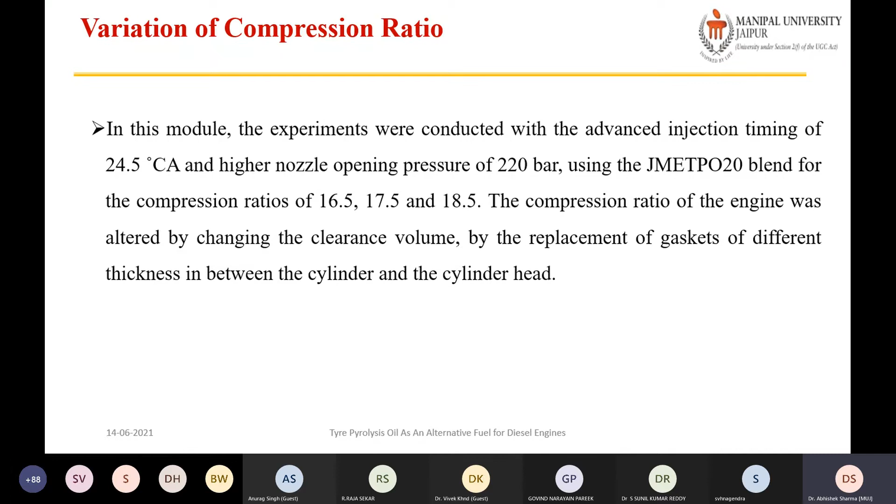After that, I also changed the compression ratio. The compression ratio set by the engine manufacturer was 17.5. So I went one higher and one lower, and among these, by these 3 engine modification techniques, I found the optimum setup for the particular blend JME TPO20.

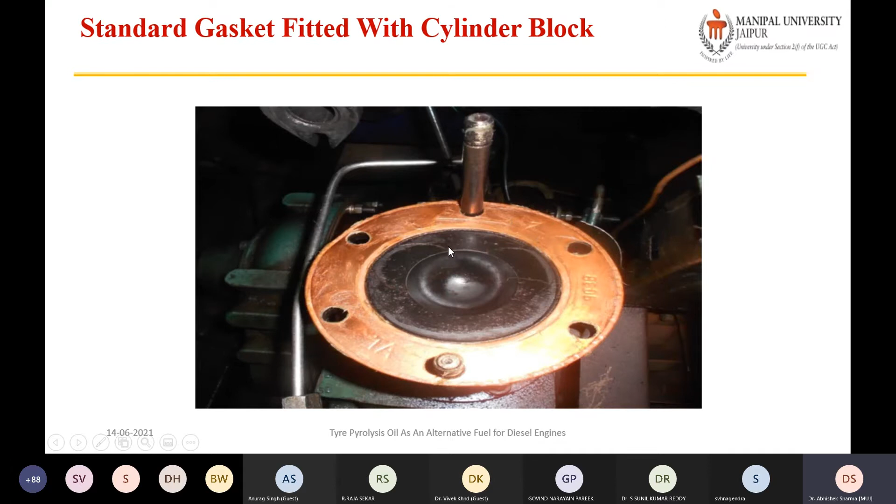So how did I change the compression ratio? I opened the engine. There was a gasket, so by measuring its thickness I prepared another gasket and changed the compression ratio of the engine. This is the photograph of the gasket.

Then, whenever we use any alternative fuel and the engine runs on it, the problem does not get solved just by that, because we need to follow ASTM norms. As per ASTM standards, we must run the engine for a minimum of 512 hours. This is known as the durability test. Only then can we claim that this can be used as an alternative fuel.

But because of the shortage of fuel, I had not run the engine for 512 hours. So I followed the Indian standard of 100 hours, about 98 hours.

Before that, I opened the engine and changed all the important parts, like the fuel filter and injector, and I cleaned the piston so that I could measure the carbon deposits after 100 hours. So I opened all these engine parts, and then carried out the experiment for 100 hours.

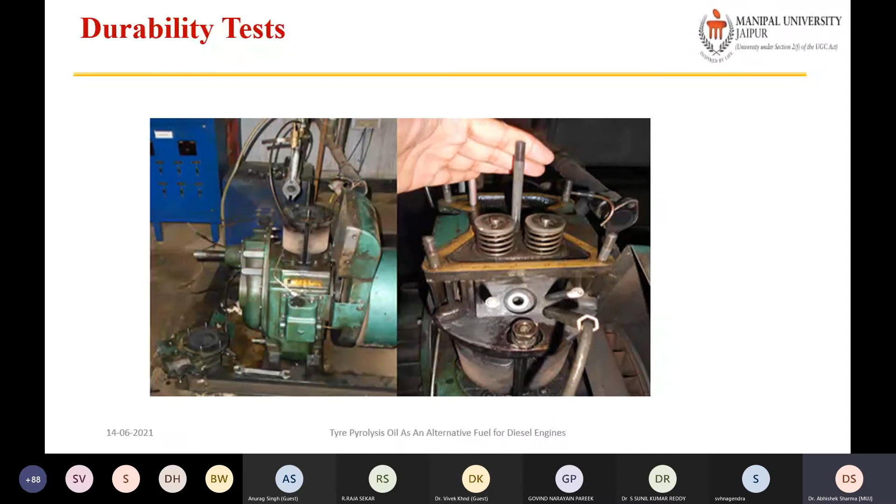Similarly, I ran the engine for 14 cycles, for about 98 to 100 hours, and then I measured and noticed all these things. So you can see in this picture the cylinder head before test and after test, and the piston crown before test and after test.

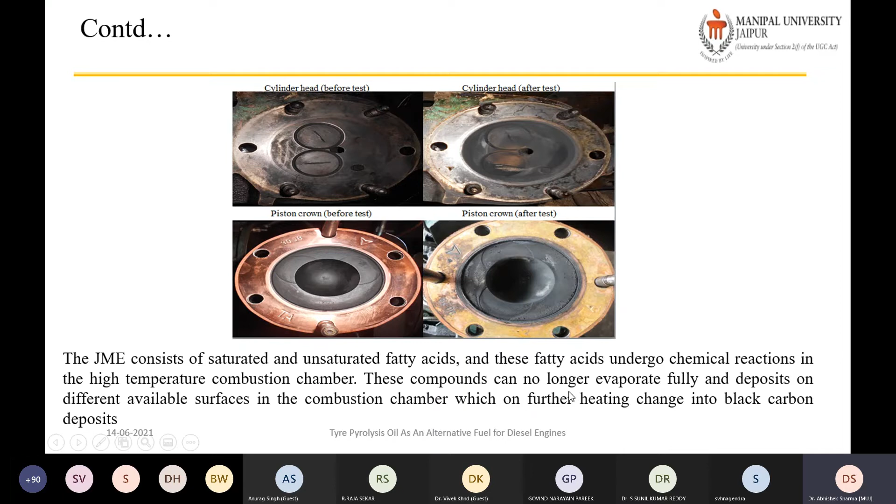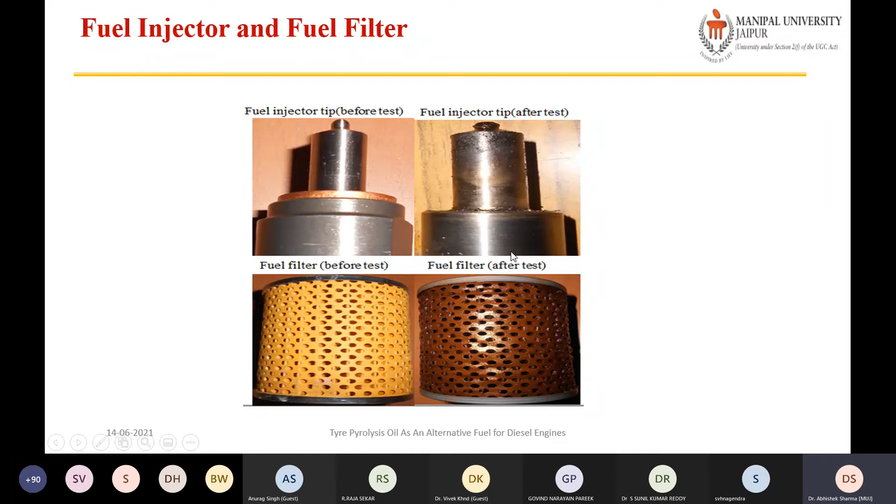The reason for the long-term storage ability problem with JME is the availability of unsaturated fatty acids. Because of that, more carbon deposits were observed. Then we can see the nozzle tip, fuel injector tip, and fuel filter — after 100 hours of the test, this much damage was there.

Further, knowing that tire pyrolysis oil comprises phenolic compounds which act as antioxidants, and knowing that the problem associated with biodiesel is long-term storage ability, I tested the oxidation stability as well. Biodiesel is more susceptible to degradation compared to mineral diesel due to the presence of significant amounts of unsaturated fatty acids with double bonds, which also affects its properties when stored for long term.

In this module of the investigation, I tested the JME TPO20 oxidation stability, but found it did not meet the desired standard. So I added natural synthetic antioxidants. The benefit was that in the case of pure JME, about 600 ppm was required, but when TPO is blended, only 200 ppm was sufficient to achieve the limit.

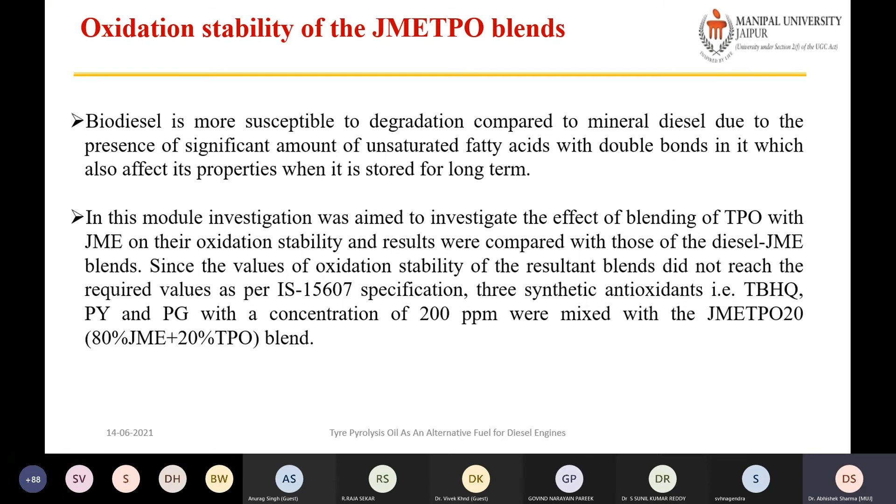Despite the many benefits, many times in news you have seen that oils are produced from plastics and from tires. Even many manufacturers have come, producing commercial plants of capacity 5 ton, 1 ton, 10 ton. Even in our university, we are establishing a big pyrolysis plant for lab waste to energy, waste to wealth. But commercialization is not becoming that much attractive in India because of the following reasons.

Despite many such plants being installed in the last 10 years, only 50% of them are still in operation. There are quite a number of issues that make the operations of these plants unsuccessful. The following are the possible reasons: inadequate safety measures in operation and maintenance of the pyrolysis plant.

First of all, I told you that these gases absorb hemoglobin. In most cases, these plants are set far away from the city, but there are persons who are working in the plant. So we must follow the safety norms, we must tell them to wear masks. All these things are important, but here we do not follow them.

Other thing is that the pyrogas, the non-condensable gases, are not properly treated by cleaning devices recommended by the central and state government regulatory authorities. If we do not follow, they will not allow us to run the plant. So inadequate training given to workers and laborers involved in the pyrolysis operation causes accidents leading to shutting down of the plants.

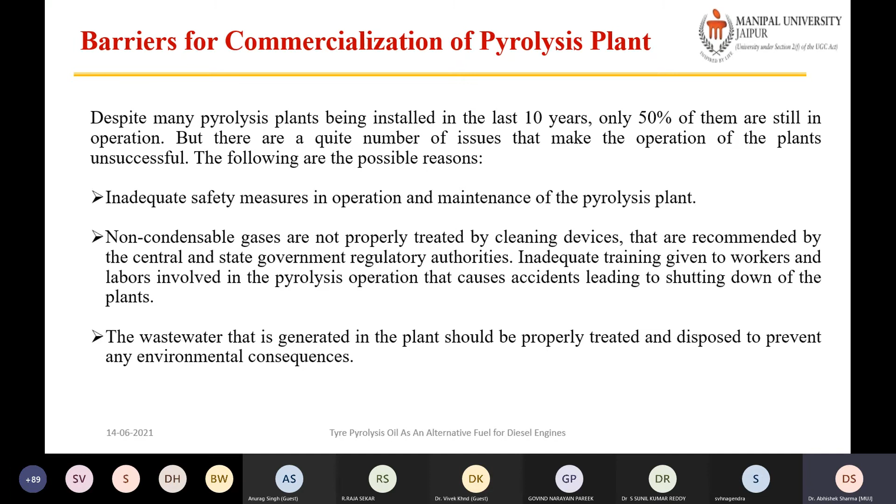The wastewater generated in the plant should be properly treated and disposed of to prevent any environmental consequences. In some plants, explosions have also been reported due to frequent opening of the reactors in hot conditions. Other issues include poor regular and periodic maintenance of the plant, insufficient power supply to operate the pyrolysis plant, scarcity of water, land and electricity, and less awareness among regulatory authorities and the public.

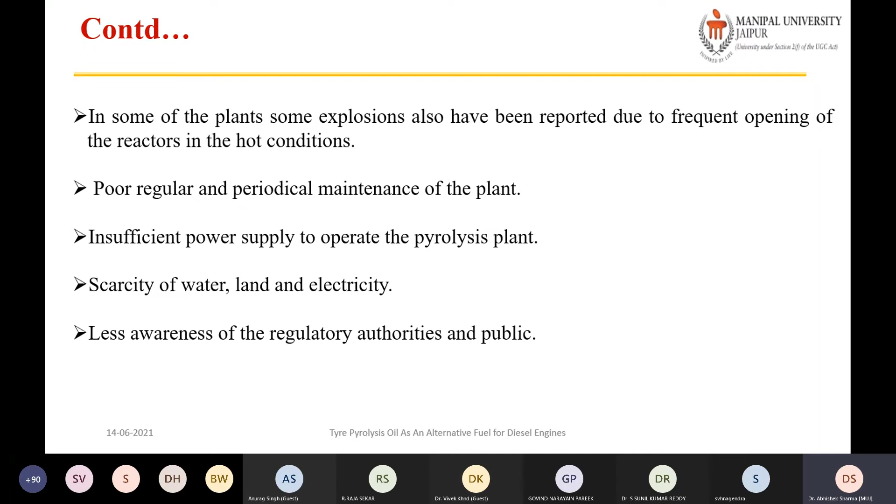So these are some of the challenges and barriers. Future scope: minimizing energy input and energy losses for practical pyrolysis reactors. Rather than sending the non-condensable gases to the environment, we can use them, and in that manner also the input energy can be reduced.

The scrap tires should be properly cleaned to maintain the quality of the output products and to reduce plant emissions. Suitable pyrolysis process and catalyst for co-pyrolysis that will yield better pyrolysis products is also a key research area, where we can find the optimum combination.

I have suggested one idea to my junior, and he has published 4 papers. What happens in campus itself? We go for tea, and so many wastes are available, tea waste. That tea waste, what we do, simply we throw it away. When we have a big campus, there is biomass, garden waste, tea waste. What we do generally is burn this garden waste. Rather than doing all this, we can produce biogas from all this waste.

We take some percentage of cow dung and mix it with tea waste and leaf waste, and we can produce biogas. The Government of India is also supporting decentralized power generation. Suppose we have 100 acres of land in our educational institutes, we can produce the energy for our campus itself, and that would be a big contribution. Even for running the mess, we can produce biogas and use it from whatever waste is generated in the campus itself.

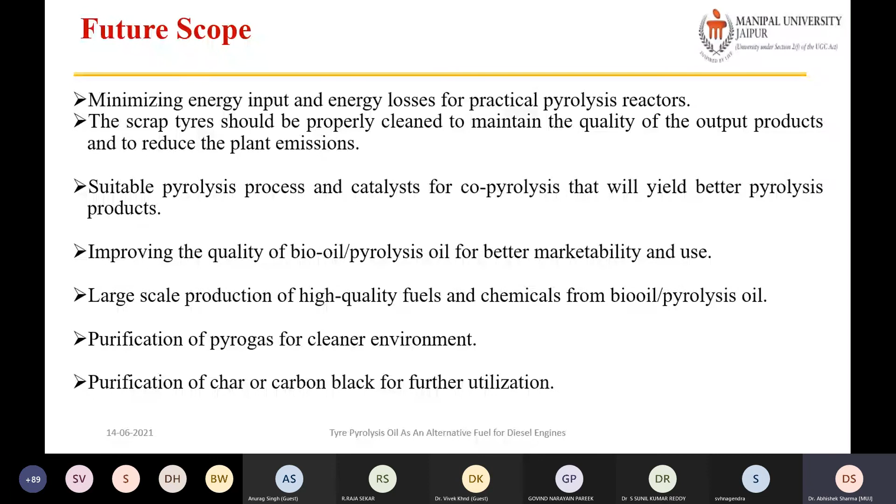So many work is going on energy storage. This can be used as an energy storage material, and also used in the refractory for industry. So by treating this waste, we not only do good for the environment, but also good business for the local and global economy.

Even in Rajasthan, I have visited some manufacturers. They are manufacturing tire pyrolysis plants and distillation plants, doing distillation of waste lubricating oil and waste transformer oil, converting them into useful form. The properties are not much closer to the initial one, but up to some extent it can be used, so this is very much necessary.

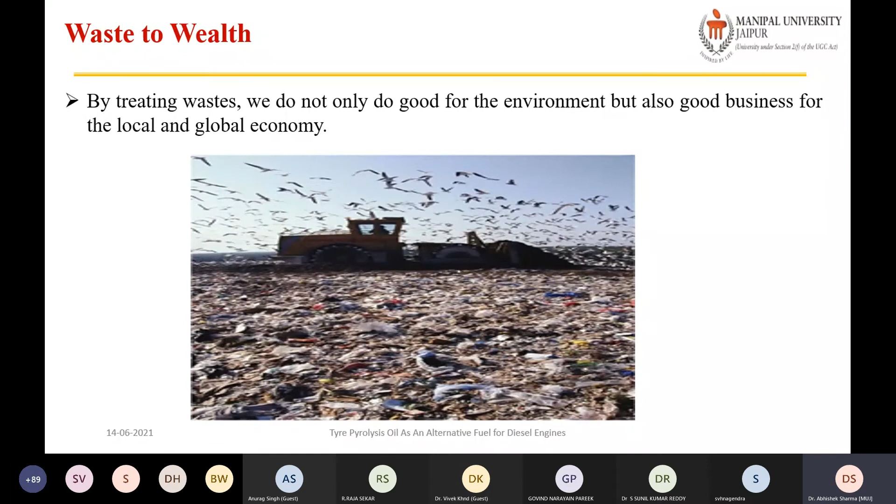First of all, we must try to minimize the waste we generate. For example, in many ads we have seen that rather than buying small packets, you buy a big packet. Rather than buying four 250 gram packets, you buy 1 kg of packaged food, because in that manner more waste will be generated if you buy smaller packets.

Then sometimes I have seen, or many people used to say that already many works have been done with biodiesel and no one is encouraging it, so what is the use of biodiesel and so many things. So for that, I would like to enlighten that even now research is going on in how they can use these biofuels, especially Jatropha biodiesel, as an aviation fuel in flights.

So in that manner, India's first flight powered by biofuel landed at the Indira Gandhi International Airport in New Delhi on August 27, 2018. The test flight had taken off from Dehradun.

Also, many plants are going to be set up, and even our minister Mr. Nitin Gadkari is suggesting to use ethanol. Some videos show him promoting this in Uttar Pradesh, where many sugar industries are there, so that waste can be used to generate ethanol and be used as fuel. He's suggesting engine manufacturers manufacture such engines where the maximum percentage of these fuels can be used.

So the SpiceJet, featuring a latest generation Q400 aircraft, had been flagged off from Dehradun airport by Uttarakhand CM Trivendra Singh Rawat. With this test flight, India has become one of the few countries like USA, Australia, and Canada who have conducted tests to use biofuel for flying commercial planes.

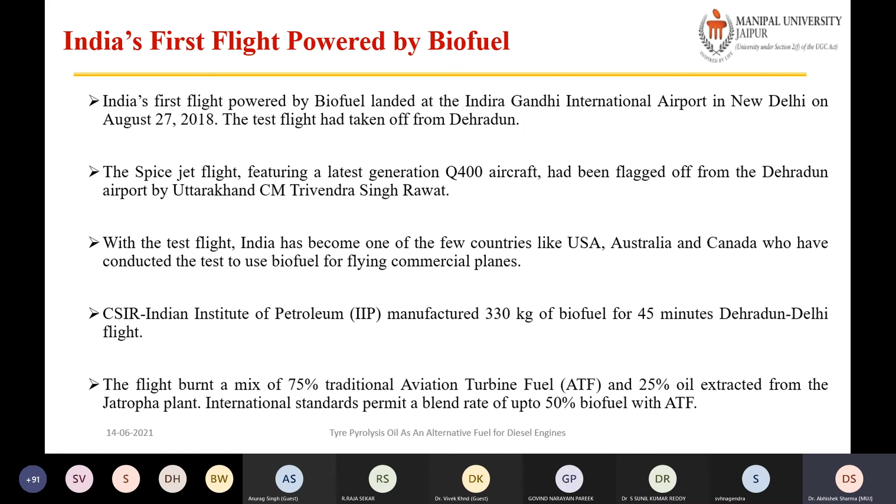So that's all about my side.